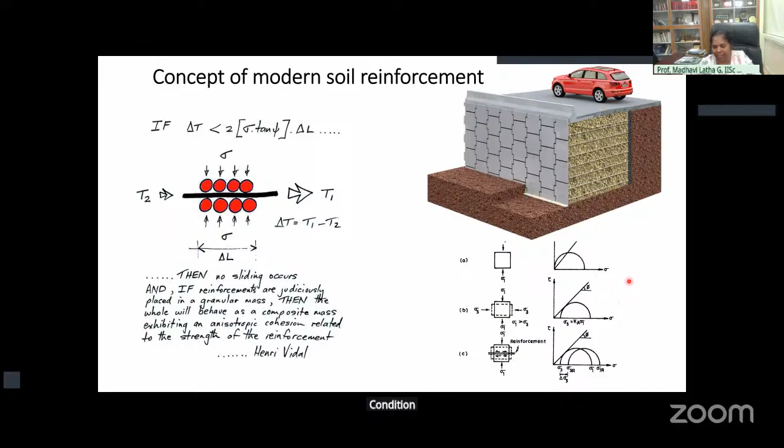With this context, we use reinforcement for different geotechnical structures, including retaining walls, foundation beds to enhance the bearing capacity, and slopes to support against sliding and other kinds of failures. When you construct an embankment over weak foundation soil, we use reinforcements either inside the embankment and also below the embankment to support these loads, and also in paved and unpaved road systems to support these cyclic loads and also to enhance the uniform load distribution.

Now, coming to the innovative geosynthetics I'm talking about. Today, I will discuss 5 different innovations that we have tried to come up with. One is geogrids with different aperture shapes and sizes. Then we also have geogrids with texture on their surface. Then we have a new class of geosynthetic system called geocell anchor cage. Then natural reinforcing geosynthetics, which are, of course, in the market for a long time, but we have some innovations in this direction as well. And then geocells with waste infill.

The first one is 3D printing of geosynthetics, which helped us in creating geogrids of different aperture shapes and sizes to customize to our needs of research currently. We have this fused deposition modeling type of printer, FDM printing, what we call in 3D printing. There are different types of 3D printing methods available in market, but for polymers, the best suited method is FDM, fused deposition modeling, where we can print the material in layers.

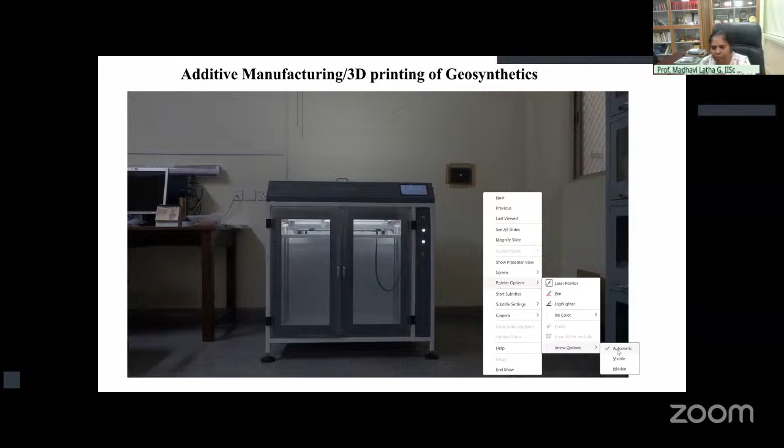This is the printing of geogrids that I'm mentioning about. Here you can see the entire printer, and we have used polylactic acid filament, which is coming into the extruder head. And here you have this nozzle in which the material melts. And then we have already given a G code to the system, which tells you the dimensions and geometry of the geogrid and the direction in which you can print. This is a simple square geogrid which is being printed here.

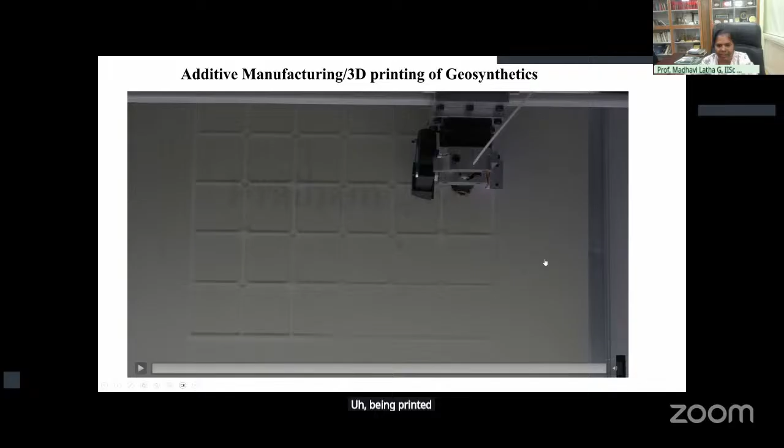And we also conducted interface shear tests on these different aperture shaped geosynthetics, where the lower box of the direct shear box and the upper box are filled with sand, and then you have a geogrid at the interface, and we apply shear, and we also do the PIV analysis to understand the shear zones that are developed. We realized that the angle of interfacial friction is the lowest in square geogrids, and Interax obviously has the highest angle of interfacial friction. In between, you have triangular and hexagonal geogrids.

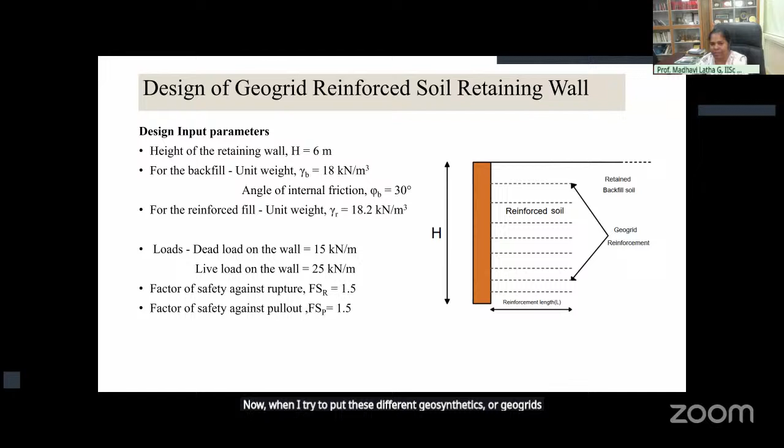And then there is some dead load and there is a live load, and we need a factor of safety of 1.5 against rupture and pull out. This is the criteria. Now, when I try to put these different geosynthetics or geogrids with different aperture shapes and calculate these factors of safety, to arrive at the minimum factors of safety against rupture and pull out, we made the calculations, and this is the length and number of reinforcement layers required for different shaped geogrids, and then the surface area of the material used, which tells us the economy of the entire reinforcement system that we're going to use.

So when you make a comparison on the percentage reduction in the material consumption compared to square geogrids, the square, there won't be any material reduction because it is a square to square comparison. In case of triangular geogrids, you have 16.5% saving in material, and hexagonal geogrid gives you 60% reduction in the material consumption compared to Interax, which gives you 50, which means that though Interax is very good at tensile strength and interfacial friction, the hexagonal geogrid is actually giving you large savings in the material because the arrangement of its ribs in 6 different directions resists pull in all these directions with least material.

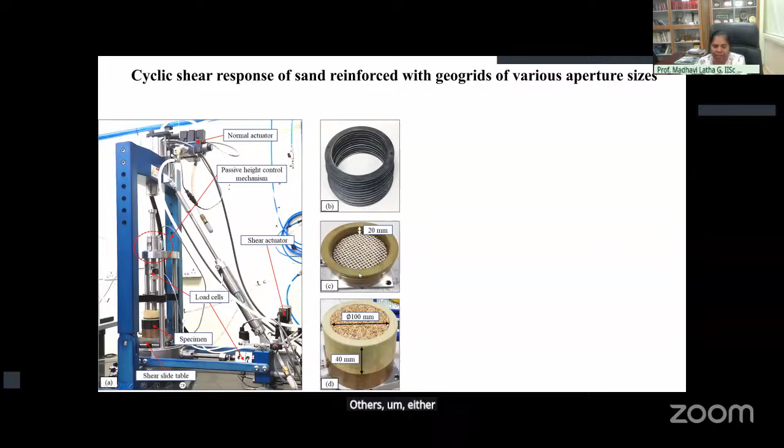This is very obvious, because when you have reinforcement in the system, sand to sand friction is reduced, and we are replacing sand partially with polymers. Polymer sand interfacial friction is definitely lesser than the sand to sand friction. That is the reason we have stiffness degradation.

However, when you have the polymer grid with aperture size matching the average particle size, you have very slow stiffness degradation. And then when we compare the excess pore pressure ratio generated in the cyclic simple shear test, when we are trying to see the liquefaction potential, the sand alone sample, that is, with no reinforcement, is actually liquefying at about 100 cycles because of the high density of the specimen.

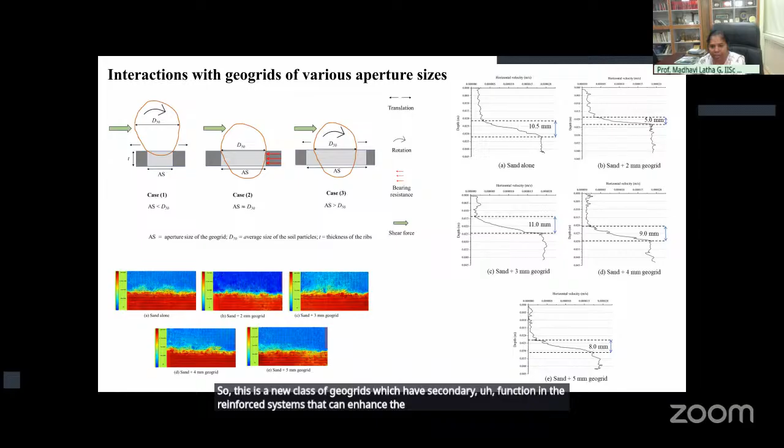So when we look at the shear bands produced, in particle image velocimetry in shear tests, we also have a comparison of shear band thickness. You have the maximum shear band thickness when particle size and aperture size match, whereas in all other cases your shear band thickness is less. This tells you that intense interactions are happening at the interface when you have an aperture ratio of 1. So this is a new class of geogrids which have a secondary function in reinforced systems that can enhance the liquefaction resistance in case of dynamic earthquake loads.

Now, the next class we are looking at is textured geogrids. If you look at the commercial geogrids, most of them have a very smooth texture. As far as I have seen, most of them are with very smooth texture. So, texture is an important parameter in geotechnical systems because it enhances the interaction between two different materials. So, we try to create different geogrids with different aperture shapes as well as different textures.

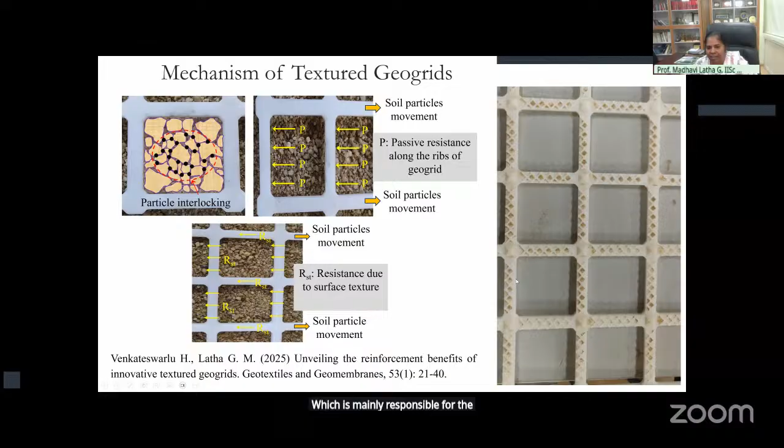Whereas when you have additional texture on the geogrid surface, apart from the passive resistance offered by the ribs, you also have resistance due to surface texture. Additionally, this is one sample of the exhumed geogrid after the test. Within the texture, the particles sit and enhance the sand-to-sand interaction instead of sand-polymer interaction, which is mainly responsible for the increased load carrying capacity and shear resistance.

Now, towards geocells. As all of you know, geocells were invented as a kind of reinforcing system for immediate needs, immediate load support, in the 1970s. Originally, they were made for providing support to structures which are moving or resting on soils of very low shear strength. Geocells have evolved over time since the 1970s, and now we have versatile geocells which can be collapsed and brought to the field, expanded and filled with soil.

And they can be used for different applications, like below the foundations for increasing the bearing capacity, below the embankments to provide load support on soft clays, and in roads in different layers to enhance uniform stress distribution and cyclic load resistance. They can also be used as facing for retaining walls. Excellent stacked facing with geocells. They are also used for erosion control.

Now, this is the evolution of geocells I am showing here. Since the 1970s, there has been a change in shape. Originally, they were square or diamond shaped, then they moved to triangular chevron patterns, to the current honeycomb pattern, which gives you the maximum enclosure with least perimeter. The surface was originally very smooth, and they are now textured, and they also have perforations to allow drainage. Originally the material was paper or aluminum, and now we have high density polyethylene and polypropylene geocells. Connections were originally made with staples or bodkin joints. Now we have moved to the ultrasonic welding process.

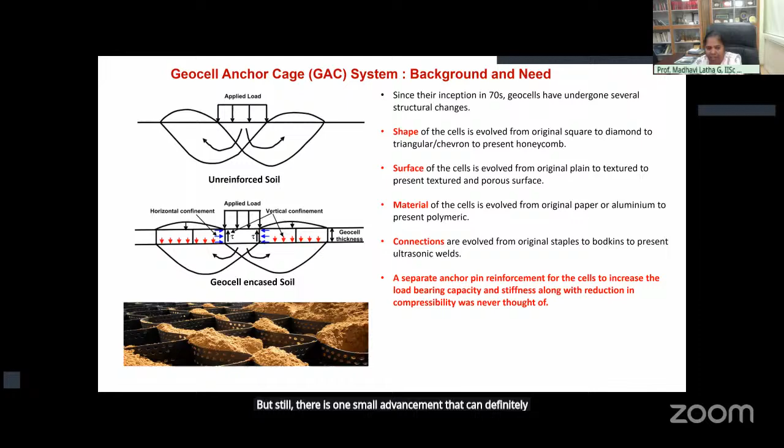All these are great advancements, but still there is one small advancement that can definitely enhance the reinforcing potential of these geocells, which I have thought about, and we have tested and established. This is called the geocell anchor cage.

To go to the geocell anchor cage, first I will tell you why geocells are an excellent form of reinforcement compared to planar geosynthetics like grids and geotextiles. When you have a geocell, it has multiple functions. One, it provides all-round confinement to the soil, and it also provides a beam effect, which acts like a mat foundation to the load. It also has a membrane effect when it is bending under the load, and it provides an anchorage effect because it has sufficient thickness along which you can enhance the interaction between soil and geocell, outside and inside.

Originally Bathurst and Karpurapu showed how this additional confinement can be quantified from simple Mohr circles, and I extended this theory to multiple geocells through my PhD at IIT Madras. Through Mohr circles we can see that delta sigma 3, which is the additional confinement due to the geocell, can be converted and quantified into the apparent cohesion induced into the soil, which is otherwise cohesionless. Now, this is proved through multiple experiments, element tests and field tests.

This is a cyclic triaxial setup that we have in our lab. A 300 millimeter by 600 millimeter specimen can be tested. This is an aggregate sample which is tested, and you can see that when you use geogrids, you have necking of the samples at locations where the geogrid is placed, whereas when you have a geocell, it is perfectly standing without any disturbance throughout the length of 600 mm, which is more than half a meter. So this is a perfect example of how geocells are very useful, not just because of the material that we use, but mainly because of the configuration of the interconnected cellular network.

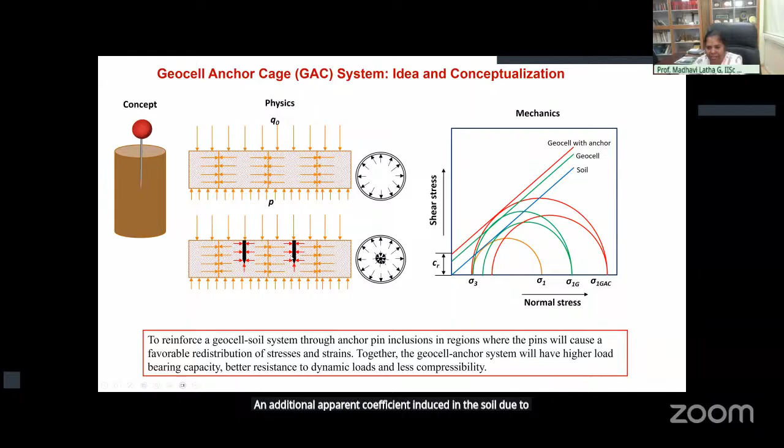This can be translated to the Mohr circle as well. You have additional confinement and additional apparent cohesion induced in the soil due to the geocell anchor cage. This is a project I executed for SERB, and we have got excellent results and publications through it. So this is the concept of the geocell anchor cage, where you have a geogrid with anchor pins which will be placed exactly at the center of the geocell layer. But this can be on top or bottom.

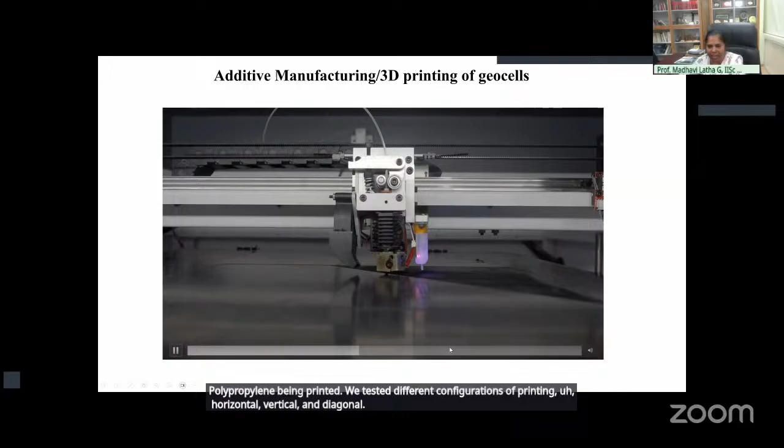So which configuration is better is what we researched also. And to manufacture these geocells with the central geocell anchor cage, again we used 3D printing. Here we used polypropylene to create geocells. These geocells are printed in the lab using FDM 3D printing. You are seeing the sheet of polypropylene being printed. We tested different configurations of printing: horizontal, vertical, and diagonal.

And then we realized that the diagonal printing gives you the maximum tensile strength as well as interfacial friction, because the horizontally oriented fibers get separated easily where they are fused within the joints, and vertical ones will only provide resistance along the filaments, whereas diagonal ones have both fiber strength and the adhesion between the filaments coming to the rescue when tension is applied. So this is also tested in interfacial friction, and intuitively you can see that the diagonally oriented polypropylene sheets provide maximum interfacial friction because of higher resistance offered to the motion of particles in the direction of shear.

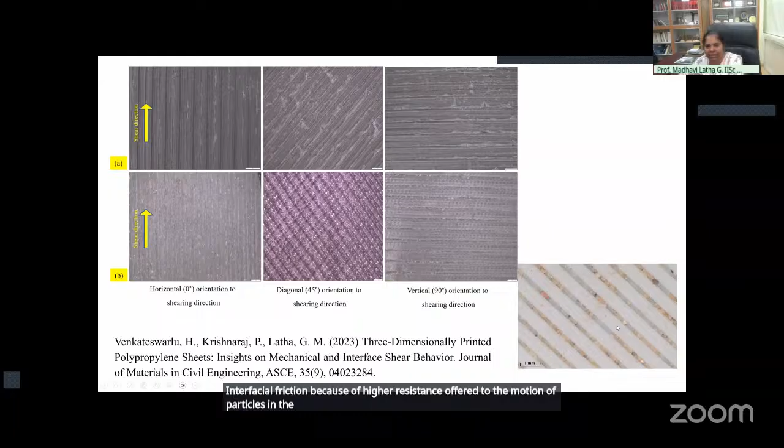Now the question here is the anchor cage. How do you manufacture it? This is the anchor cage 3D model, which is developed in AutoCAD and then converted into an STL file, which is needed for the 3D printing. And this is the 3D printed geocell with a 3D printed anchor cage. This anchor cage is made of polylactic acid.

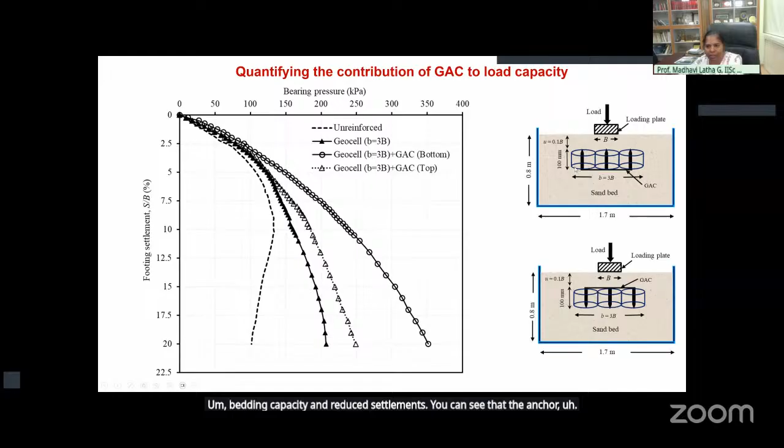Now, you have the load test on these geocells with anchor cages in different configurations, top down and bottom up kind of configurations. And we see that the one where we keep the basal geogrid at the bottom with the anchor pins facing upward gives you the maximum bearing capacity and reduced settlements. You can see that for the anchor cage with geocells up to 3 times the breadth of the foundation, in both up and down configurations, the bottom-up one is much superior to the top-down configuration.

Now, this is equal to when you have 3 geocells with a simple anchor cage, it gives you the same reinforcement benefit as a 4 geocell reinforced configuration, which gives so much savings in the materials. Now, quantifying the bearing capacity ratio, you have almost 2.75 to 3.5 bearing capacity ratio with geocell with anchor cage compared to the system without anchor cage. The reduction in settlements is also more than 60% when you have this geocell anchor cage because it provides basal support, and also there is a mechanism which I'm going to explain now.

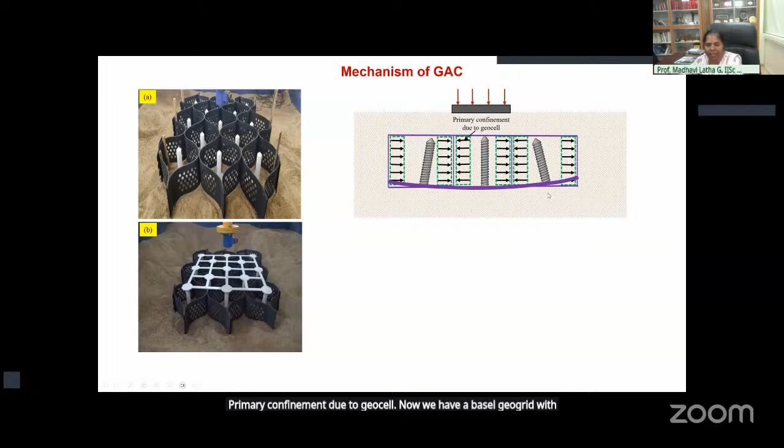This is the top and bottom configuration. And if you have this geocell layer, you have this all-round confinement effect acting like this. Primary confinement due to geocell. Now we have a basal geogrid with anchor pins, and under the load it tries to bend and the pins converge. Now you have this additional confinement effect due to the pin, and then you also have the anchor pin acting as a shear connector, and then the soil acting as a frictional medium. So the entire system of geocell plus basal grid and anchor pin becomes one system with frictional sand in between and additional confinement due to the pin, which is responsible for this enhanced bearing capacity ratio, almost 3.5 times the original bearing capacity.

Now, if you put the same anchor cage at the top, you are missing the basal support, and the pins diverge instead of converging, so that reduces the confinement effect, and that is the reason for lower reinforcement benefits of this kind of configuration. And when you look at the surface heaves, the top configuration still gives you some heave, whereas the basal grid with anchor pins gives you absolutely zero surface heave.

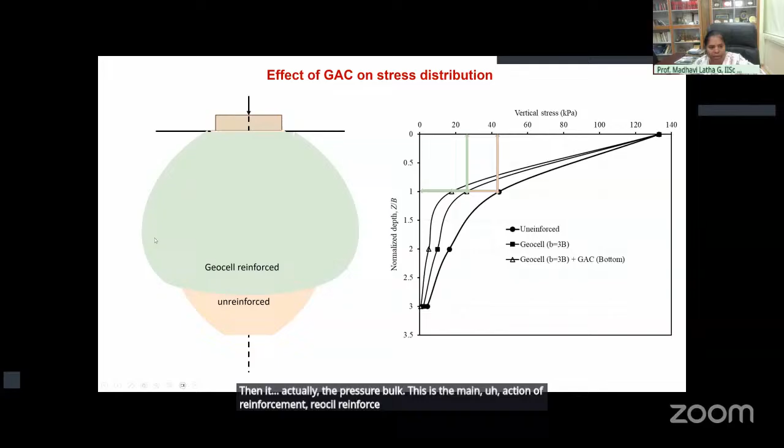And the distribution of stresses below the foundation, for the case of unreinforced soil, is like this pressure bulb. If you have geocell with thrice the breadth of the foundation as its width, then it changes the pressure bulb. This is the main action of geocell reinforcement. It reduces the height of the pressure bulb and distributes the loads more horizontally. Now, if you have an anchor cage, it further reduces the depth of the pressure bulb and enhances this load distribution, which is very, very helpful in the case of pavements.

And then you have multiple benefits of these geocell anchor cages. One is improved confinement, improved lateral resistance, and improved anchorage effect, because you have 4 faces getting anchorage effect. And the beam effect also increases because of enhanced stress distribution. And you also have an enhanced membrane effect because of the additional tensile strength offered by the anchor pins.

Now, when we are talking about earthquake resistance, how geocell anchor cages or geocells can be helpful is a very, very interesting topic, because for earthquake resistance, the main function needed from the reinforcement is ductility. Because the more ductile the system, the higher the earthquake resistance of the system. So, for example, you have a boat riding on a wave. As long as the boat moves along with the wave, there will not be any damage.

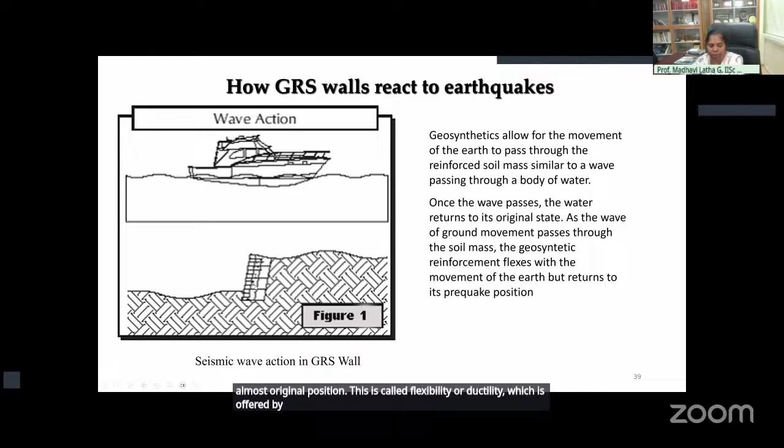Similarly, a reinforced retaining wall, when there is an earthquake, is very flexible and deforms in line with the movement of the shear waves which are passing. And once the shear wave recedes, the retaining wall comes back to almost its original position. This is called flexibility or ductility, which is offered by reinforced systems in general. But now with enhanced reinforced systems, you can improve the ductility even further.

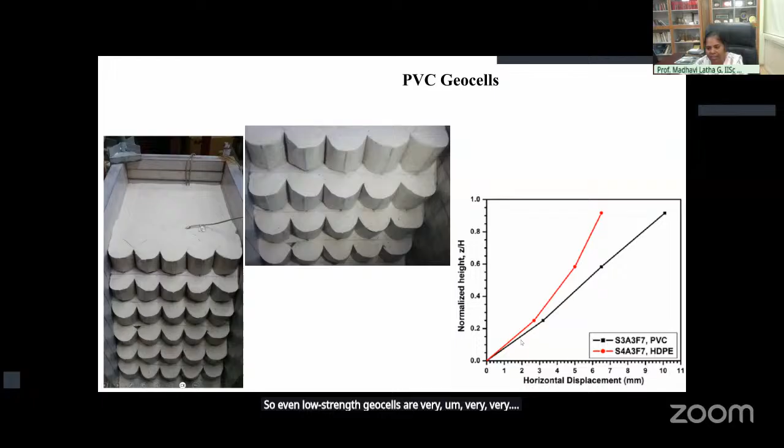Now, we can also use 3D printed geocells. There are 3D printed PVC geocells, which can be made as low strength geocells. But like I already said, the strength of geocells, or the reinforcement action of geocells, is mainly due to the cellular confinement network and all-round confinement, beam effect, and membrane effect. So even low-strength geocells are very, very useful in reducing deformations under seismic loads.

Now, the next innovation should be in the form of the fill material within the geocells. For example, we use high friction sand. Typically, we use cohesionless soils within the geocell pockets to provide the reinforcement for retaining walls, embankments, and foundations.

But the world is running out of sand. There is depletion of sand resources, and we have an immediate need to find alternate materials. Manufactured sand is being used in construction, but it has yet to enter our geotechnical constructions. If we stick to cohesionless soils with the friction angle requirements specified by our codes, we will have a lot of problems constructing reinforced soil structures in the coming days. So we have to look at alternate materials, and the world is looking at alternate materials too.

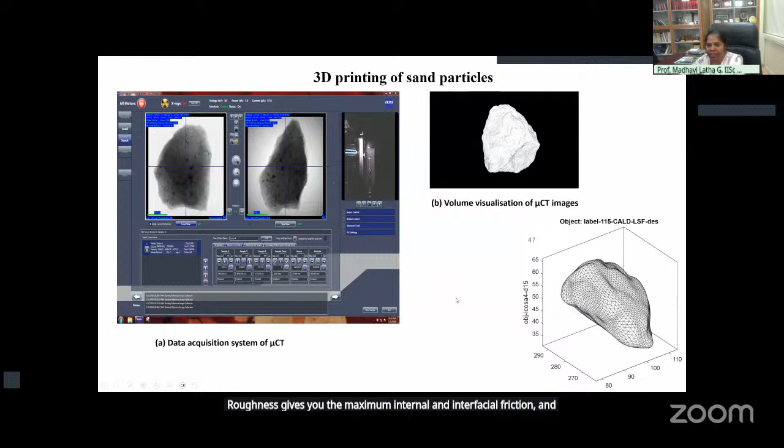So to do this, we have very fine micro level research going on where we can actually create sand particle shape and size. When manufacturing sand, we want a good sand with sufficient particle friction and sufficient surface roughness, so we can get maximum benefits from interfacial friction and overall internal friction. This is the micro CT of a natural sand particle, which can be converted into a geometric shape through spherical harmonics. You use micro CT to get the shape parameters, then use mathematical formulations to create the geometry of these particles, and research what particle shape, size, and surface roughness gives maximum internal and interfacial friction, using waste materials to produce these sand particles.

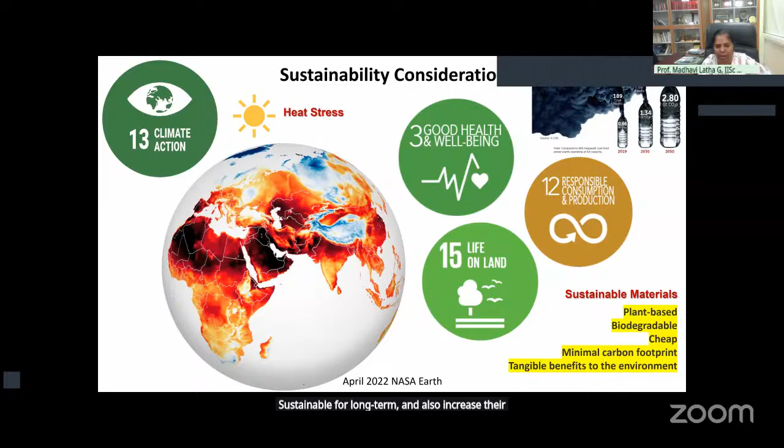To improve life on land and life underwater, we need to move towards good health, well-being, and responsible consumption, with lower carbon footprint materials. Plant-based biodegradable materials come to the rescue because they are very cheap, biodegradable, and sustainable. The only problem is they are of very low strength and not sustainable for the long term. So we need to find methods to make these materials sustainable long term and also increase their interaction with soil, so we get benefits similar to what we get from polymeric reinforcement.

We are working on this. There are materials like coir and jute, which can potentially be used to make geocells, geogrids, and geotextiles as well. They already have enhanced interfacial friction because of their natural surface texture. But the main problem is their tensile strength, which is comparatively low.

But these can be enhanced with interventions like geocell anchor cages that I mentioned before, so that the reinforcement of the system is equal to the reinforcement provided by polymeric geosynthetics. The only concern is the long-term sustainability. I'm also working along with the chemistry group of IISc to provide solutions for the non-biodegradability and hydrophobic nature of geosynthetics when they come in contact with water and soil. So that's still at a research stage.

But to give you a brief on how these materials can be extremely beneficial under conditions prone to liquefaction, we tried cyclic simple shear tests with coir fibers. And interestingly, a lot of earthquake liquefaction resistance is exhibited by the samples which are reinforced by coir fibers. If a natural sand failed within 9 cycles, the liquefaction happened, whereas a specimen reinforced with coir fibers to 0.75% by its volume showed resistance up to 65 cycles, which is a great, significant improvement. And the stiffness degradation is very, very slow in the case of reinforced specimens.

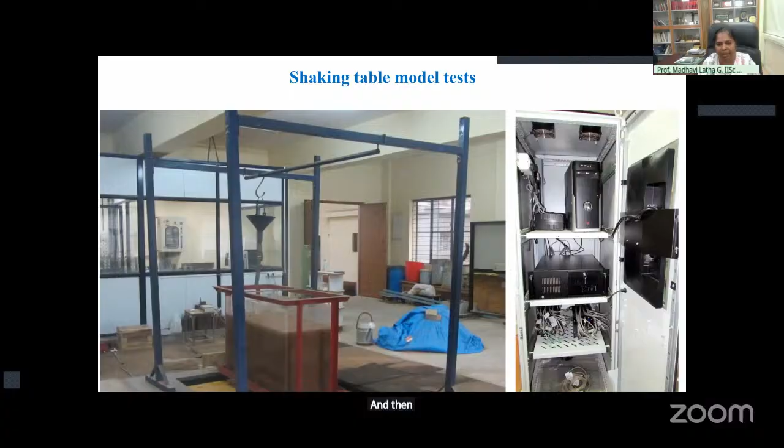And then we also did shaking table model studies to check the large scale applicability of this. We see that the unreinforced specimen failed quickly under shaking, whereas the coir reinforced model did not fail or liquefy even up to large shaking. So the main mechanism here is the pore pressure response; you can see a very, very low pore pressure response. The main reason is that when you are applying shear, the coir fibers are getting stretched, and that provides additional tension, which opposes the movement of particles. Also, the interstitial pressures within these coir fibers actually reduce the pore pressure propagation from bottom to top, which is the main reason for liquefaction resistance.

So this research tells you that there are ways in which we can use natural materials in our geotechnical systems for secondary functions like liquefaction mitigation, which has to be explored in the future. And there are sustainability considerations which make all the innovations that I've shown in today's presentation very sustainable, because we can explore eco-friendly options with technical interventions. We reduce a lot of waste through smart manufacturing, and we reduce carbon footprint because we use less material, natural resources are used very little, and we use automated construction methods. And this is how this becomes a very sustainable thinking process towards achieving the sustainable development goals. Thank you so much.

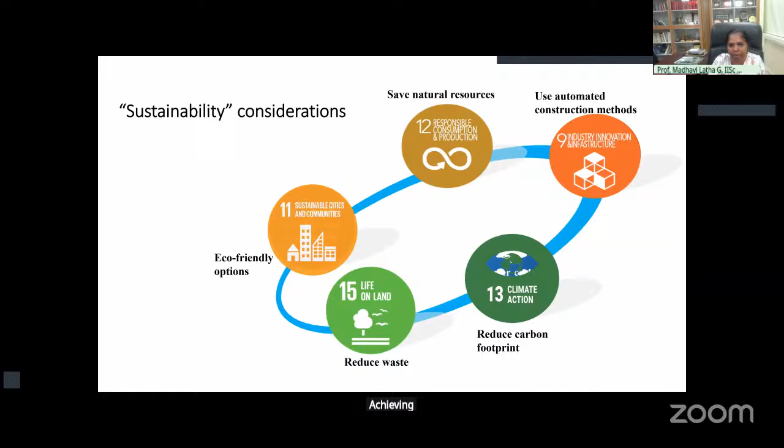Thank you, Professor Madhavi Latha. And I must say this was a very energetic session that we had, marking the very first session to be highly energetic. So we'll be quickly taking a few questions in the Q&A session. Okay. Yeah, sure.

So let us take the first question, from Mr. Haldar. The question says, in an earth retaining structure, can I use geogrid layer by layer? It can reduce the thickness of the earth retaining structure. I didn't quite get the question. Geogrids are being used layer by layer. It is not about reducing the thickness of the retaining structure, because the height of the retaining wall remains the same. The higher the height, we have maximum benefit, right? We are going to increase the height of the retaining wall by putting reinforcement, because we are able to stop the failure due to overturning and sliding even up to larger heights. So the purpose of reinforcement is to increase the height with the same material.

Thank you. So the next question is from Mr. Mandal, and the question says, how will installation damage affect the texture of the geogrid, which will affect the increase in BCR? Yes, it's a very interesting question. Yes, the geogrid texture, when you are trying to put large boulders, it can actually become flattened. So this needs some research. Definitely, I'm not saying outright that nothing happens to the texture. But most of the time, the texture that we are providing is not sharp in nature. It's a kind of flat texture. I have shown a diamond shaped texture which has flat edges. So intuitively, I think it will not get damaged by installation or passage of vehicles on it, but it needs to be tested.

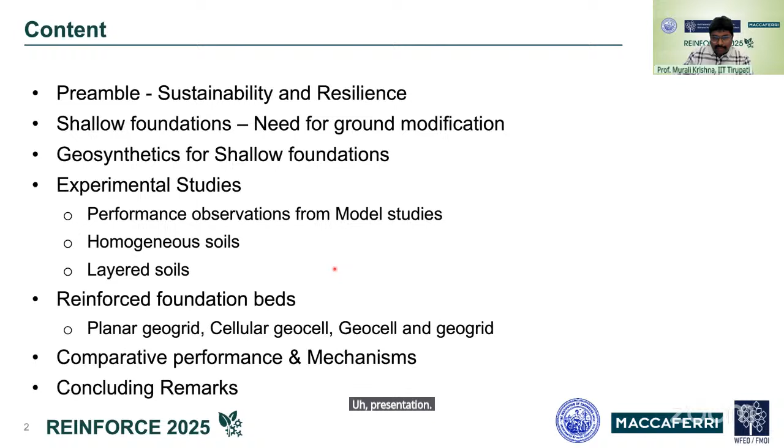Before going further, I would like to acknowledge the people. Dr. Arghadeep Biswas, who was my PhD student at IIT Guwahati and is now working as faculty at Jadavpur University. The student was co-guided by Professor Sujit Kumar Dash, who is currently a professor at IIT Kharagpur. And of course, Professor Sireesh, who is working at IIT Hyderabad. We were contemporaries at IISc. During my PhD time, he was doing several model studies on geocell reinforced foundation. That is where I was exposed to geocell reinforced foundation systems.

So as I said, a preamble: we are witnessing significant infrastructure growth in the country. Of course, for any country to be a developed nation, its infrastructure growth is of primary importance. While developing infrastructure, we have to ensure resilience and sustainability, which is a very significant aspect we need to focus on.

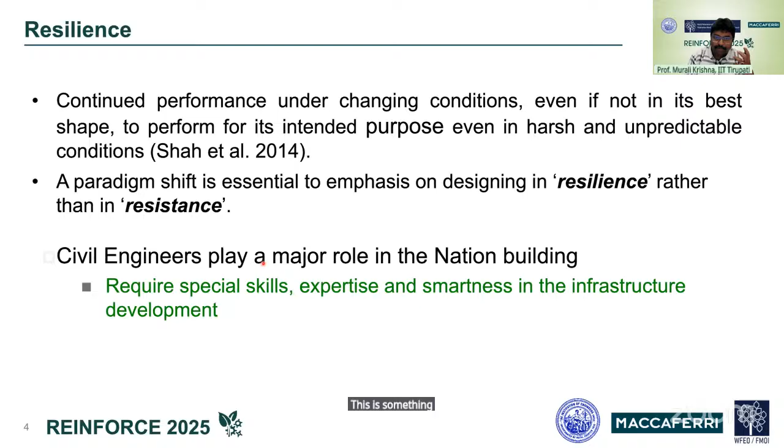As part of this nation building and infrastructure development, all civil engineers play a major role in ensuring sustainability and resilience in the infrastructure we are developing. This requires special skills, expertise, and smartness in infrastructure development, basically understanding various new developments, new materials, what the sustainable approaches are, and how to enhance resilience. These are the key elements. This is the preamble I would like to set as the context.

In some situations, we need to replace the topsoil when the bearing capacity is not meeting the requirements. This could be a complete replacement, with some material involvement. What we are trying to see in today's lecture is how we can modify this particular ground, how we can observe its performance, and so on.

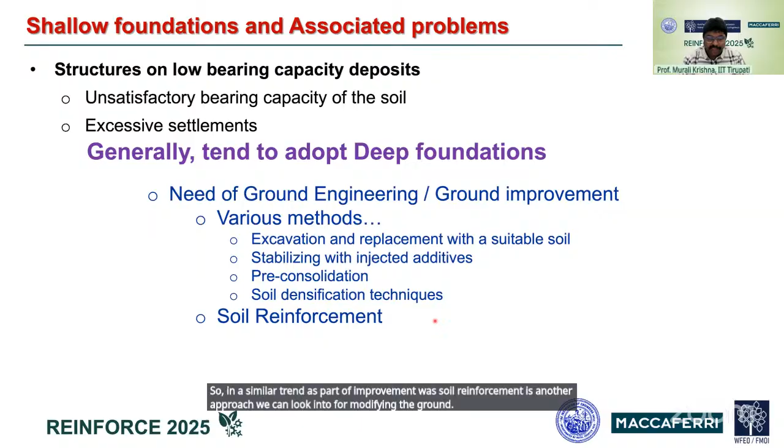A simple one is the excavation and replacement with a suitable soil, or stabilizing with injected additives, some grouting, etc. In very soft soils, where there are soft clay deposits, one can go for consolidation, pre-consolidation approaches. In some cases, in loose sandy soils, soil densification techniques could also be used. So in a similar trend, as a part of improvement, soil reinforcement is another approach we can look into for modifying the ground and enhancing the performance of the foundation system.

What can we do? So let us see how foundations on reinforced soil beds could be seen. What we do here is remove the existing weak soil up to some shallow depth below the foundation, and replace it with granular soil, preferably granular soil, reinforced with horizontal layers of high strength reinforcement, geosynthetic reinforcement, metallic reinforcement, etc. Different strength reinforcement can be included, of course.

So what are the advantages of these reinforced soil beds? It will increase the bearing capacity, and obviously it will reduce the settlement, of course. Another big advantage is that it will reduce the differential settlement. That's a major advantage. The whole system works monolithically, and reduces the differential settlement. In many cases it can avoid the deep foundation situations. We can reduce the necessity for deep foundations. Sometimes we can change the type of foundation; let us say if you want to go for a mat foundation, we can avoid it, and some other deep foundations could also be avoided. So there are some advantages that we can see.

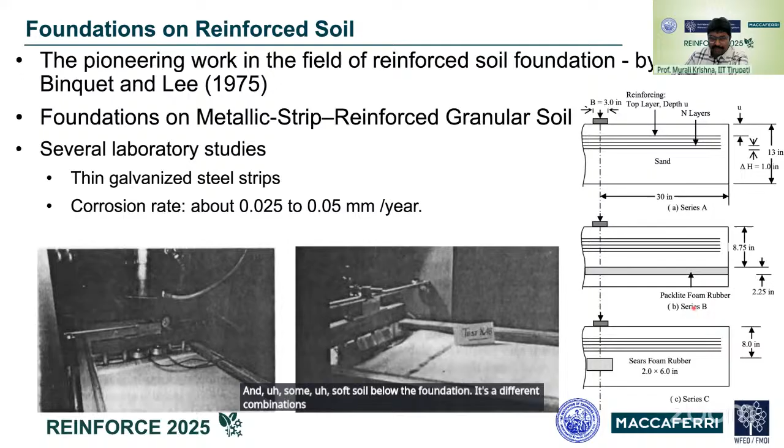So that's how the reinforced soil foundations work. Now, going to the studies on reinforced soil foundations, the whole credit goes to Binquet and Lee in 1975, where the pioneering work was done. They did some model studies concerning the strip foundation. In that earlier study, they used galvanized steel strips as the reinforcement, small strips, and they considered some thickness, which also takes care of the corrosion rate. The typical foundation configuration they considered had different reinforcement layers, different depths below the foundation, and some soft soil below the foundation. Different combinations they considered and tested. And this is the first study of its kind.

In arranging this reinforcement configuration, this is a more detailed schematic view. If you see, a footing of width B has been placed, and the first reinforcement is placed at a distance U from the bottom of the footing. And you can see there are, for example, n number of reinforcement layers placed. Each of the reinforcement layers has a width of B, and these layers are spaced at a small h apart. This is the typical configuration that people see.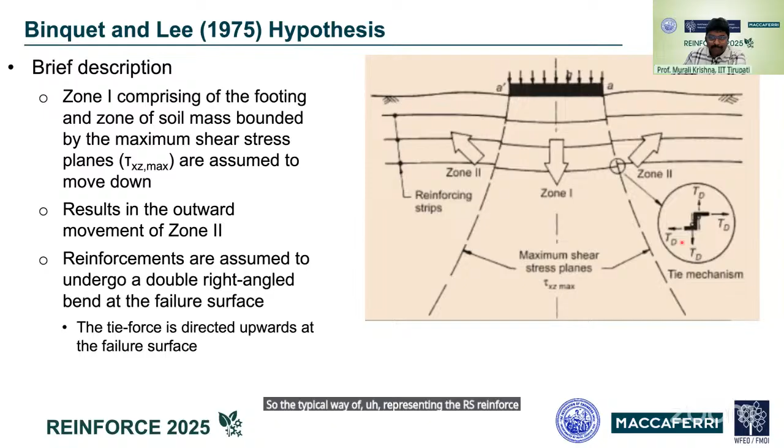A double right angle bend is expected at the junctions, which will produce a tie force in the upward direction, opposite to the direction of the loading. So that is the typical way of representing the reinforcement force. This is a starting point, and several studies were done modifying different conditions. So there is a way of quantifying this zone: at a different depth, at what distance this particular failure zone could be developed.

This is one study by Shin et al., where they have quantified the distance with depth, at what depth and what distance that particular failure zone will be there. This is the minimum distance. This will give us some idea about how much reinforcement length is to be provided, which is depicted in this particular figure. Some other studies are also there where they presented hypotheses of different bearing capacity behavior, in terms of the generation of the failure surface and the resistance. These are different possible ways of looking at it.

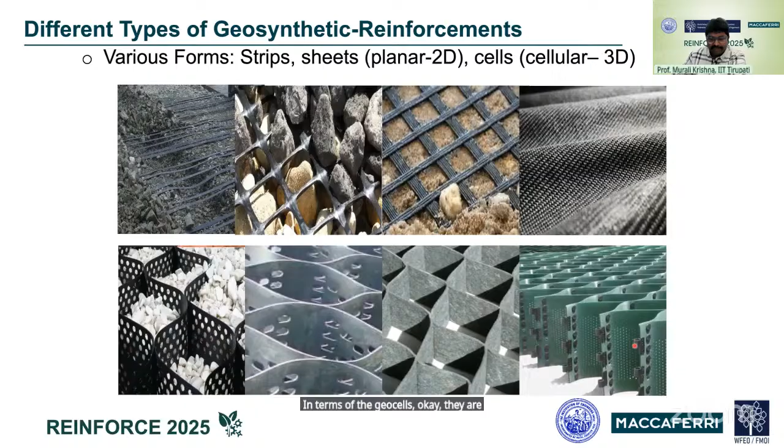And bearing capacity improvement is widely used for embankments and storage tanks, which are large structures, by applying geosynthetics and reinforcement. So that sets the context of geosynthetic reinforced foundations, the preliminary studies, and the typical observations we can see. Now, as I mentioned, different forms of geosynthetics are there, like uniaxial geogrids, biaxial geogrids, geotextiles, geomembranes, and the three-dimensional geogrids in terms of geocells. They are ready-made geocells.

Referring to the previous configuration that was discussed, a typical shallow foundation bed reinforcement configuration could be of this nature. If we are using a two-dimensional geosynthetic material as reinforcement, we can have multiple layers below the foundation, or we can also use a geocell layer in the foundation system. Several earlier studies have considered homogeneous soil, either very soft soil, which could be a sand or clay type material, and focused on how the improvement is obtained. So these are the typical responses observed from different studies.

This is one model test setup which was used by Sirish in 2006 for studying the improvement in the performance of geocell foundations. It shows a typical configuration of the load setup, where the loading has been applied and the surface deformations are observed, along with some pressure observations inside. This is a sort of plane strain condition simulation to observe the improvement in performance.

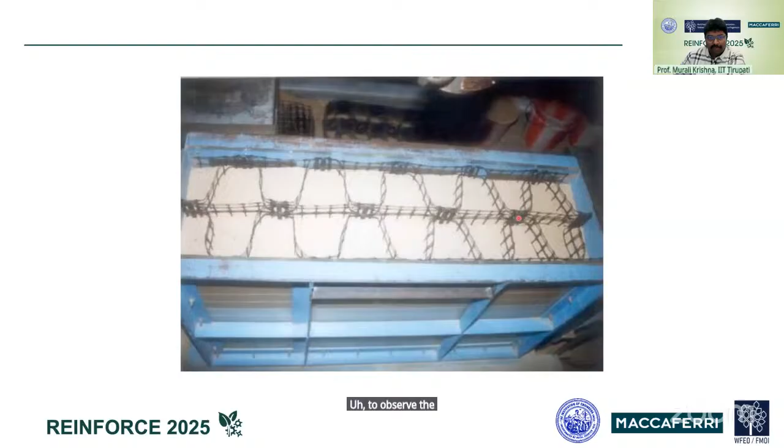So in general, if you summarize the geocell reinforced foundation system, the geocell sand matrix would have a thickness of H, the thickness of the geocell. The diameter of the foundation is represented by D, and U is the depth from the foundation base at which we are placing the geogrid or geocell, and other things.

So when you look into the geocells, the aperture opening size is another important parameter. Orientation of the ribs and what pattern is being adopted is seen. And various researchers have focused on different parametric ways, and they conducted different tests.

Our study, as done by Argadeep, focused on the influence of subgrade strength and test geometry on the performance of the geosynthetic reinforced foundation. You see here some homogeneous soil to some significant depth is taken. It could be of different strength values, different material.

So as a first step, different alternatives are considered. The first is removing the top soil and filling with unreinforced sand. Generally, this is the common approach. When the soft soil is there, some topsoil will be removed and replaced with good fill material, and then conducting the test. This is the primary one.

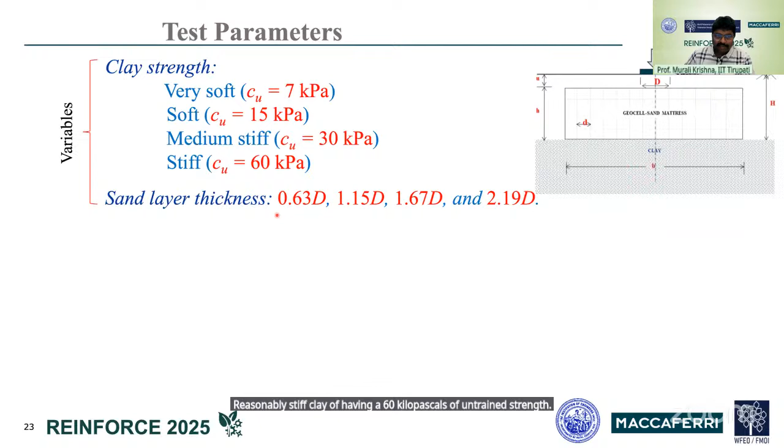So the variables considered are the in situ clay condition. It could be a very soft clay with undrained cohesion of 7 kilopascals to a reasonably stiff clay having 60 kilopascals of undrained strength. The study also considered different variations of the sand layer thickness, the capital H here, which includes the thickness of the geocell and reinforcement, and U is the top one. So we considered these four different variables.

And some other constant values considered: the depth of placement U is constant in all the cases, 0.1D. The pocket size of the geocell matrix has been considered as 0.8. The relative density of the infill sand and the top sand layer has been considered as 80%. And of course, the width of the geocell matrix and base width of the geogrid, B, is considered as 6 times the diameter of the footing. This is the general configuration considered.

So with those parameters, 5 series of experiments were conducted to understand the effect of subgrade strength on different parameters of H by D and others, and this is the experimental program. So we will see one by one. This is the model setup.

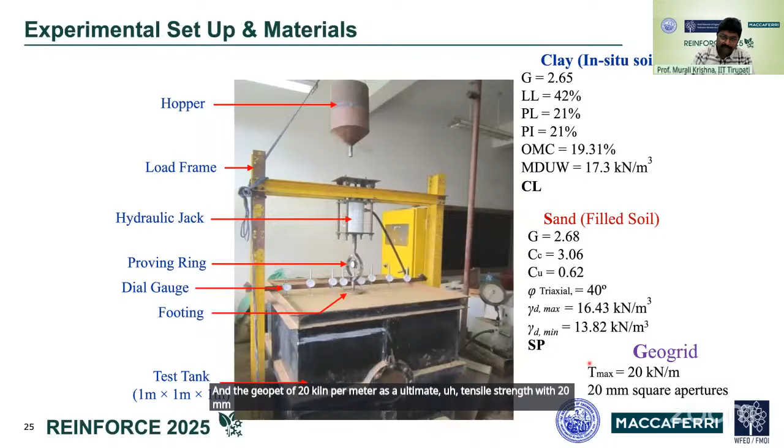Which is primarily a 1 meter by 1 meter by 1 meter test tank, and a footing of 150 mm diameter is considered, and the clay soil having these properties, which is CL, and the sand soil having these properties, poorly graded sand, and the geogrid of 20 kilonewton per meter ultimate tensile strength with 20 mm square apertures. There are some properties of the clay and other materials shown here.

And for preparing the clay bed, several trials were done varying water content and compaction, and some standardized density and water content values were obtained to arrive at the desired shear strength of the soil. And the soil has been filled layer by layer to obtain the complete test tank filled with it.

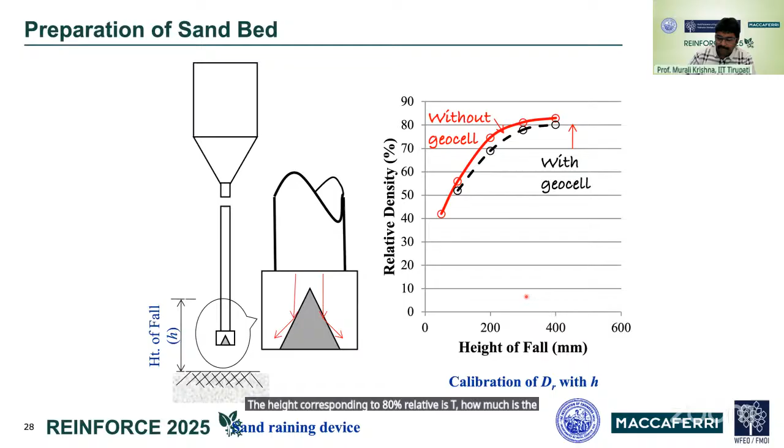And over that sand has been placed, and the sand bed was prepared using the sand raining technique. From the hopper, sand will be poured, which will be dispersed here. To get the targeted relative density by this method, several trials were conducted, and the height of fall corresponding to 80% relative density has been followed. And this is a typical picture of the sand raining technique, a simple one. Of course, there are several sophisticated setups where large chambers could also be placed and sand placed automatically.

Geocells have been prepared using the GeoGrid, and the GeoGrids were cut into transverse and longitudinal members. They put together longitudinal members and transverse members, connected using the bodkin joints. The strip is considered the bodkins, used to form the geocells of this nature. This is the geocell, in various configurations.

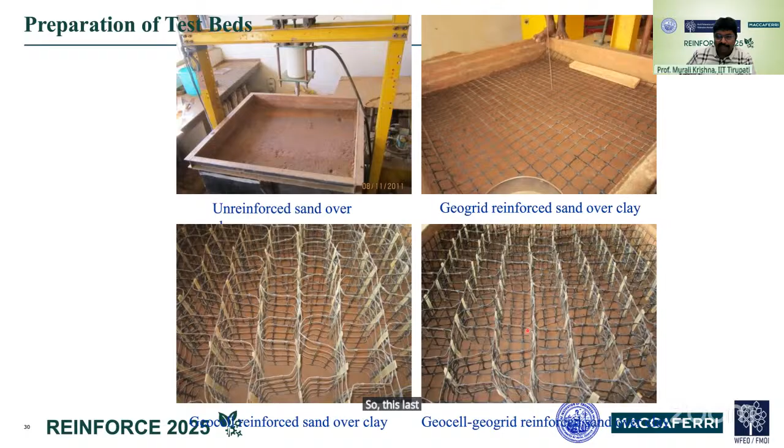This is the unreinforced sand over clay bed. This is a GeoGrid reinforced sand, where only GeoGrid has been placed. This configuration shows only the geocell. This last configuration is where the GeoGrid, the base, and geocell come together, placed onto the system.

As we have seen earlier, the typical response of unreinforced soil and reinforced soil gives two types of responses that can be obtained. The analysis of these results will be done in terms of the bearing capacity ratio. The bearing capacity ratio is calculated for a given settlement — at that settlement value, what is the unreinforced bearing capacity, and what is the reinforced bearing capacity? The ratio, QR by Q naught, will give you the bearing capacity ratio.

Another parameter that can be considered for evaluation is for a given loading condition, Q. For a given loading condition, what is the settlement in the unreinforced case, S naught, and what is the settlement in the reinforced case, SR? This ratio also shows how much settlement reduction is obtained.

Sometimes we can also represent the bearing capacity improvement rate with reference to its unreinforced capacity — how much is the rate of improvement. This is QR minus Q naught, the difference between these two, with the ratio over the original one also being represented. This bearing capacity improvement rate can also be used for obtaining some results analysis.

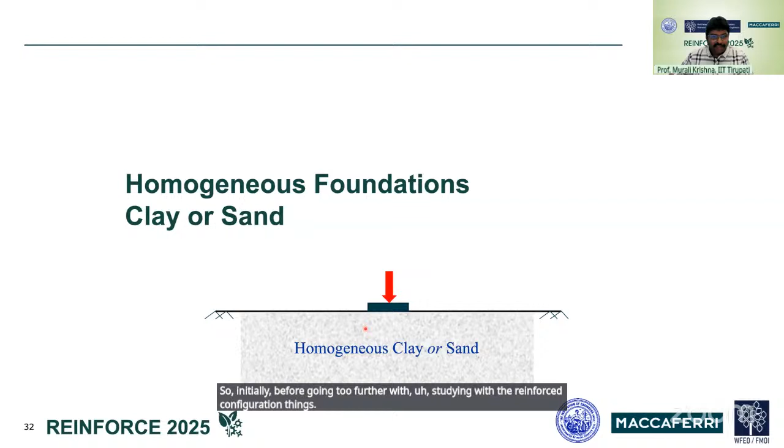Now going to the test results that were obtained. Before going further with studying the reinforced configurations, it is essential to look into the unreinforced sand responses. Here, homogeneous clay or sand has been used for testing. As mentioned, there are four types of clay subgrades and one sand subgrade used.

These are 7 kilopascals, 15 kilopascals, 30 kilopascals, and 60 kilopascals CU value, showing how the foundation responds. It's very obvious that when you increase the subgrade strength, the in-situ soil strength, we get improved performance, which has been significantly improved.

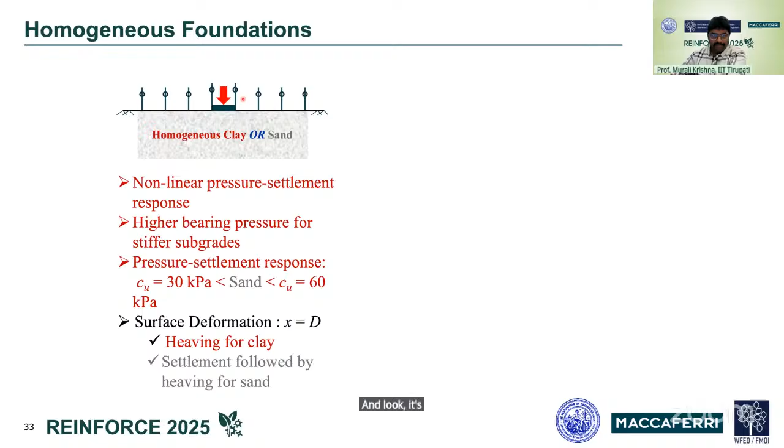Another test with 80% relative density sand has been used as a material and tested for its capacity as a whole. We can see the 80% relative density sand shows slightly lesser bearing pressure compared to the 60 kilopascal case, and of course this gives larger strength compared to up to 30 kilopascal. It's also observed that heaving of the surface occurs when you load, and heaving at the surface has also been obtained in this case.

The second configuration has the top some thickness of the soil replaced with sand soil. Again, it's a layered configuration, but unreinforced — there is no reinforcement in this case.

When you see the responses, the dashed line shows the homogeneous soil case, and this solid line shows the layered soil with sand having 0.63 times D as the thickness. In all the curves, we can see there is a significant improvement in the capacity when we are replacing the topsoil with unreinforced sand.

While conducting tests for different thicknesses, the optimum layer thickness has been obtained as 1.67 D. If you replace the top 1.67 D with sand, that's the optimum thickness. This thickness can be modified, so these are some configurations for a given case.

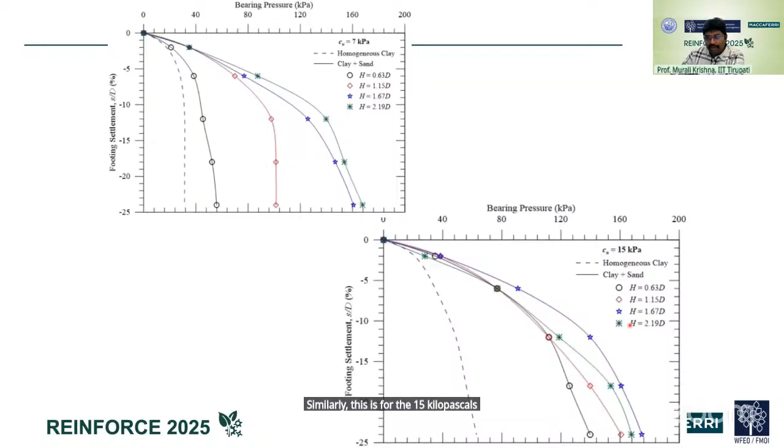Homogeneous clay of only 7 kilopascals, having the unreinforced homogeneous soil, and for different thicknesses of the sand layer, the improvement is represented here. Similarly, this is for the 15 kilopascals undrained shear strength soil, and for different responses, how the clay plus sand performs is obtained. From this, it has been observed that 1.67 is ideal.

The next step is including the reinforcement at the interface between the sand and clay. A geosynthetic reinforcement has been placed here, and the responses were observed. This is a typical picture of what we can see — the geogrid for different undrained shear strength values, and different 0.63 thickness were considered.

Reinforced sand layered configuration, and the reinforced layer configuration again has been shown. So again, you see from the unreinforced case to the reinforced case, there is a significant, very dominating improvement with the inclusion of a single planar geogrid at the interface, irrespective of all the configurations. We can read and understand the different levels and so on.

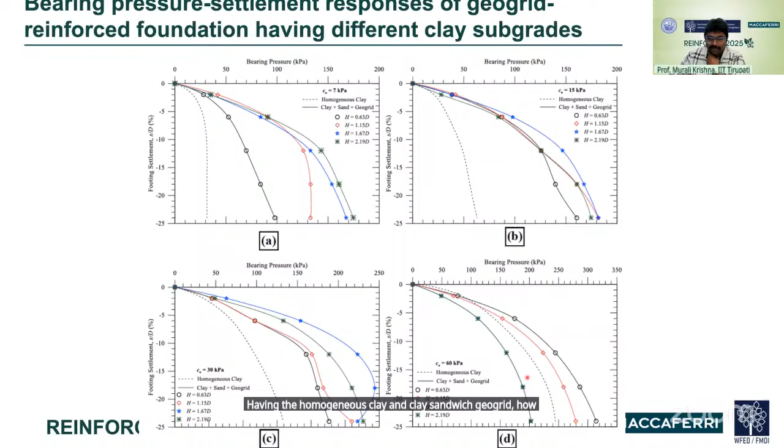For softer subgrades, the optimum thickness has been obtained as 1.67 times the diameter. If we have a stiffer subgrade, for example a 60 kilopascal subgrade, then 1.15 times the diameter is the thickness we can obtain. Again, those results were obtained for 7 kilopascals, 15 kilopascals, 30 and 60 kilopascals, having the homogeneous clay and clay-sand bed with geogrid, and how the different performance could be obtained. These pictures are self-explanatory.

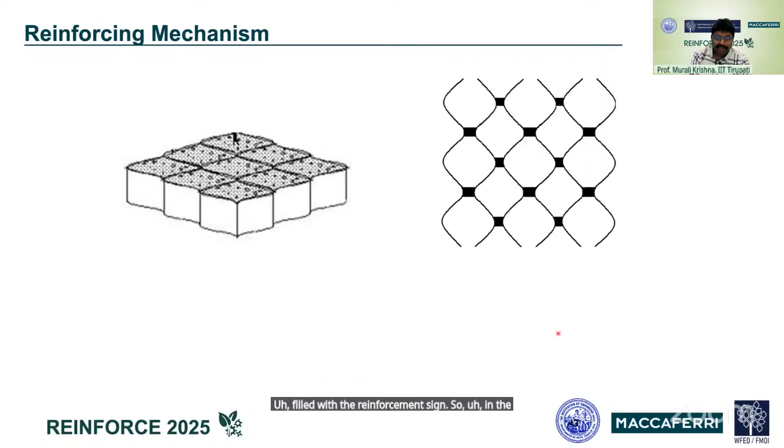So in the geocells, the confinement, interaction, locking, and various mechanisms will occur. The main mechanism which we can dominantly see in the use of geocells is the confinement. Confinement is a special mechanism which operates in the geocells to further enhance their capacity. So this is how the confinement works along the walls and the interface section also, and this geocell would act like a semi-rigid beam, dispersing the load to a wider area and enhancing the capacity. That's what will happen. Schematically, one can represent it by the improved area, confinement, and interaction among the components. So how the shear could be developed can be represented in this one.

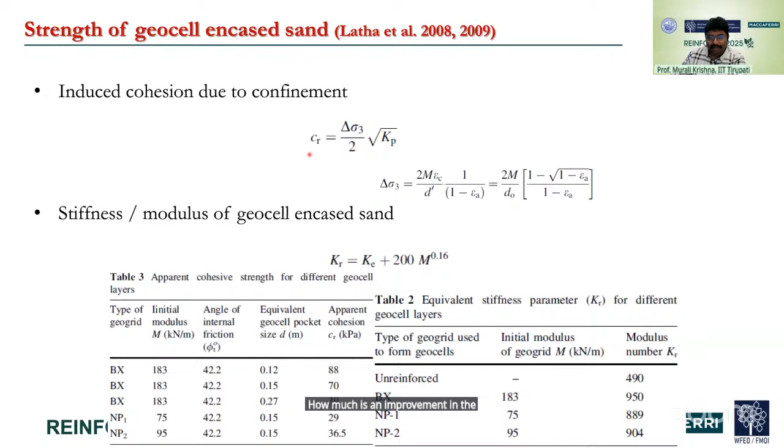The effect of these geocells on the improvement has been studied, as Professor Madhavi Latha previously also mentioned. Some element tests and model tests were done. They quantified how much the improvement in strength is in terms of the delta sigma 3 lateral confinement effect and other ways, and evaluated the improvement in terms of lateral dispersion effects, how much the vertical stress dissipation effect is, the membrane effect, etc. These could be used to quantify the bearing capacity of the improved soil using the geocell approach.

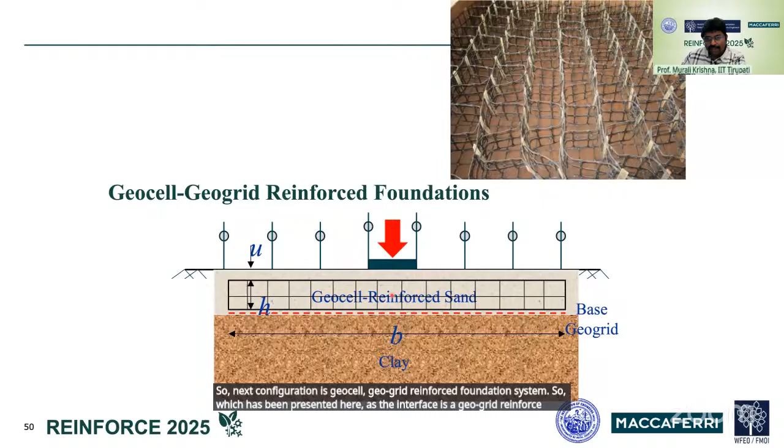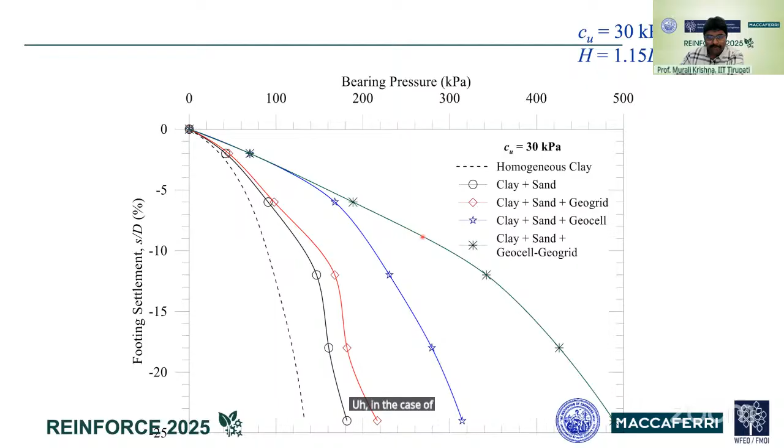The contribution of different things in terms of either sand layer contribution, geogrid, geocell contribution, and geocell and geogrid contribution could be quantified with reference to the different reference parameters. So sometimes we can use the homogeneous clay bed as a reference, we can use the unreinforced layer foundation as a reference value. So we can get the improvement level of different contributions with reference to the earlier explained parameters, either bearing capacity ratio, improvement factors have been obtained. So the typical improvement factors, what we can see.

So when your subgrade strength is very low, you will be getting very high significant improvement factors, and in a moderately high subgrade strength, you will be getting relatively less, but still you are able to improve the capacity to a much higher level, up to about 2 to 3 times. And for settlement level, these improvement factors would be enhancing with the settlement levels and so on. So these comparisons are with reference to different subgrade strength and other things.

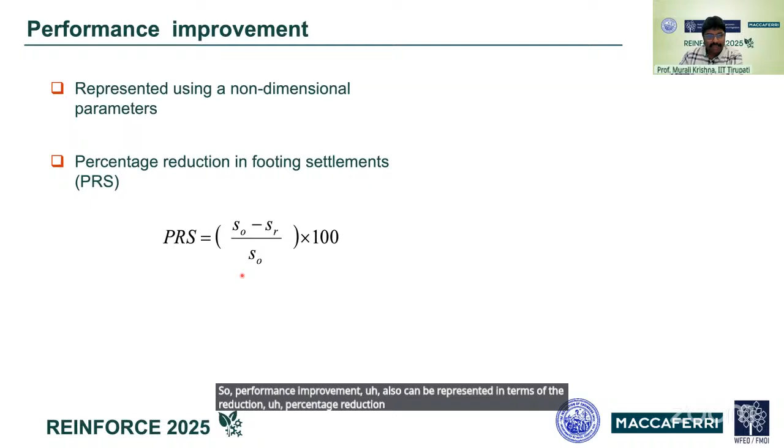So performance improvement also can be represented in terms of the percentage reduction in the footing settlement. It is like an improvement rate parameter, which can also be used for evaluating the capacity. So how much is the percentage reduction in settlement also could be seen here. So here about 60% to 90%, a significant reduction could be obtained with the inclusion of different things. So what mechanisms operate, how they will operate, quickly let us have a look.

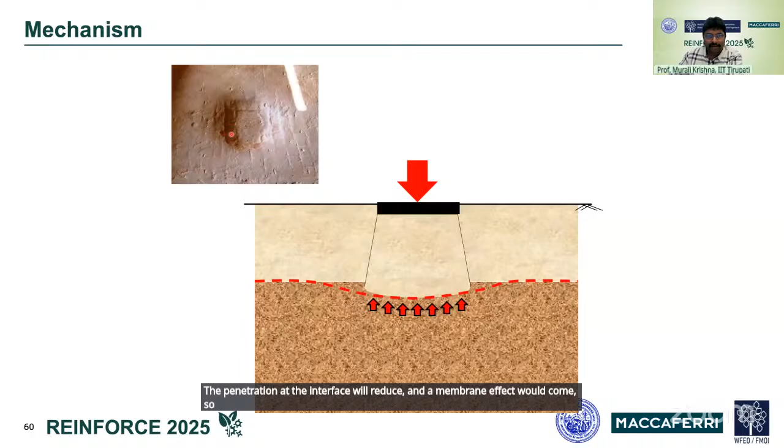And when you are having the layered configuration without reinforcement, we can see the penetration at the interface, a significant penetration, and deformations are larger. When you introduce the geogrid reinforcement, the penetration at the interface will reduce and a membrane effect would come. So this is a typical representation of the thing. When you are having the geocell reinforcement, the penetrations would be much less, and a large semi-rigid beam type behavior could be seen, and at the interface you can see much less deformation.

The super level of reinforcement configuration with the geocell and geogrid, when you place them, you will be getting much higher performance, and you can see literally there is not much deformation at the interface, and loads are being distributed too wide. This is an unreinforced case. This is reinforced with the geogrid geocell. You can see the extent of the deformation at the interface and so on. In this case, there is an interlocking between the base geogrid and geocell that can be seen, which will be providing much support. There is a possibility of the top layers buckling a little, but it doesn't matter. Your performance will be good.

So with that, I conclude. Geosynthetic reinforcement, in any form, is very effective in enhancing the foundation capacity. Of course, in the level of order, if you can see the things. Improvement or the performance depends on the footing settlement level. Depending on the serviceability condition, whether 5% of the footing settlement, 10%, depending on that, we can achieve the different levels of improvement.

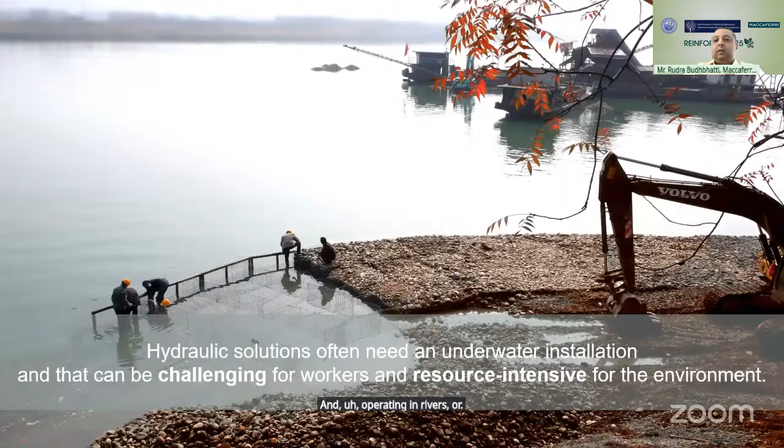So the effect of climate change combined with the ever increasing requirements of urbanization often requires work in both rivers and coastal environments to operate underwater. And operating in rivers or, in general, in hydraulic environments, projects often require working partially or sometimes totally underwater. This means that we need to face more challenges as far as manpower is concerned.

Another typical case is the construction of bridges spanning across rivers, where piles require an erosion protection solution for their foundation. Even harbors and marine areas are frequently required to increase and modernize their capacity, and hence require more erosion protection due to the increased effect of navigation. So the technological developments of the industry in the last decades focus more on both environmental quality and on the sensitiveness of the working environment through risk assessment.

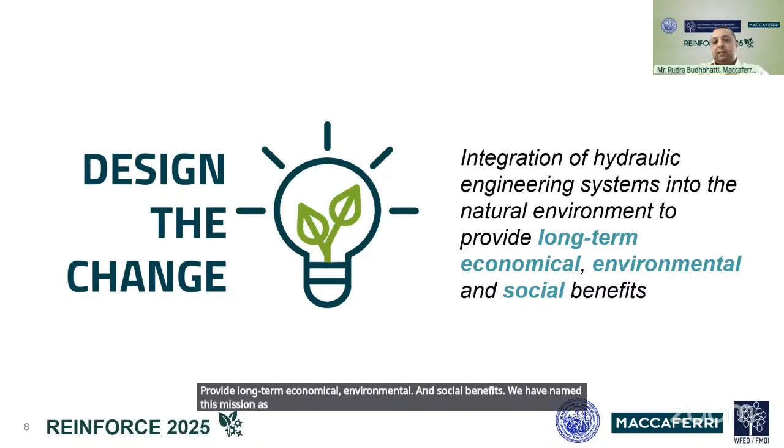The research studies on erosion protection systems focus on the importance of the resilience of the ecosystem to provide long-term economical, environmental, and social benefits. We have named this mission Design the Change. With this in mind, while you know that Gabion mattresses or Reno mattresses are quite common these days as hard armor lining, especially for bank protection works, we have researched and developed an improved type of mattress, which we call Reno Mattress Plus.

Now let's have a look at what it is. In this slide, you can see that Reno Mattress Plus has various components which are a little different from the standard mattress. Starting first with the double diaphragm. Typically, the mattresses are with a single diaphragm. This is a double pleated diaphragm to make it stiffer.

Then we have X ties to connect the base to the lid, and also an improved version of the polymeric coating, which we call PoliMac, to give very good protection against mechanical loads as well as chemical aggression, because these are all hydraulic solutions and in constant touch with the water.

Now, the high pressure resin polymer also makes the mattress particularly suitable for river environments and even very harsh, polluted environments as well. The road to this development, meaning the Reno Mattress Plus, is not something very old, in the sense that, of course, the first mattress version was developed way back in 1920. This was followed by the invention of Reno mattress in 1960.

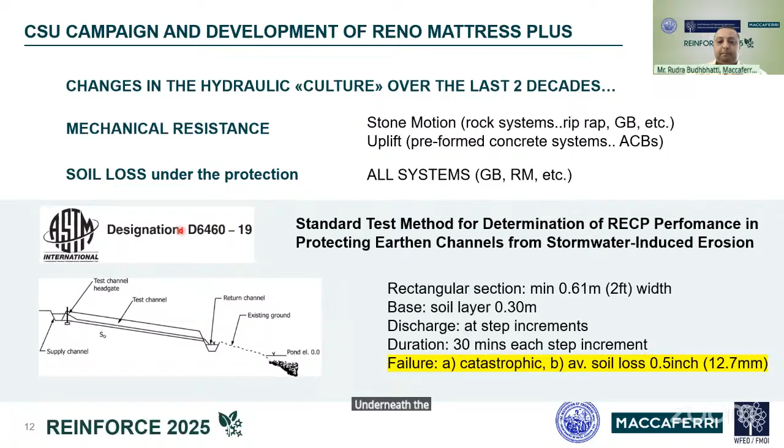So the traditional riverbank solutions constructed with loose stones, or what we call riprap, require quite thick layers of material to be effective. And with the Reno Mattress Plus development, the thickness of protection can be drastically reduced, thus strongly reducing the material consumption. This very much optimizes the use of materials without compromising on the effectiveness of the solution, thanks to the better performance of Reno Mattress Plus. And this, of course, brings along a huge amount of cost savings.

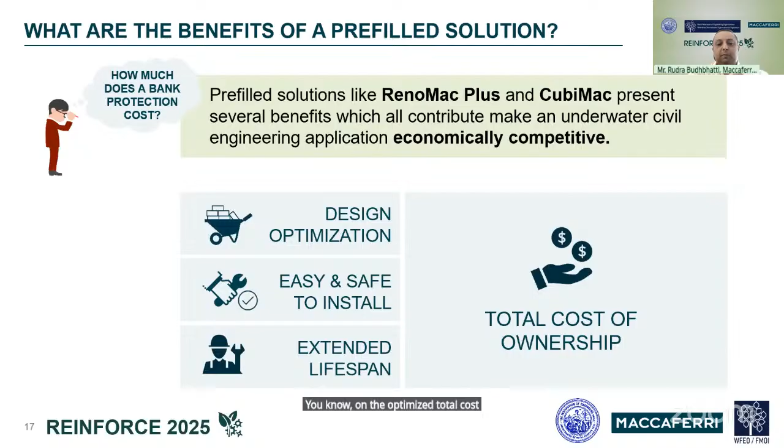Once the pre-fill units are filled, basically they can be stocked at a convenient site and then transported. So here you can see examples of Renomac Plus on the left, which is pre-filled and ready for transport. And on the right, you can see the CubiMac, which is again a pre-fill unit, and it is in stock and it can be quickly transported to site.

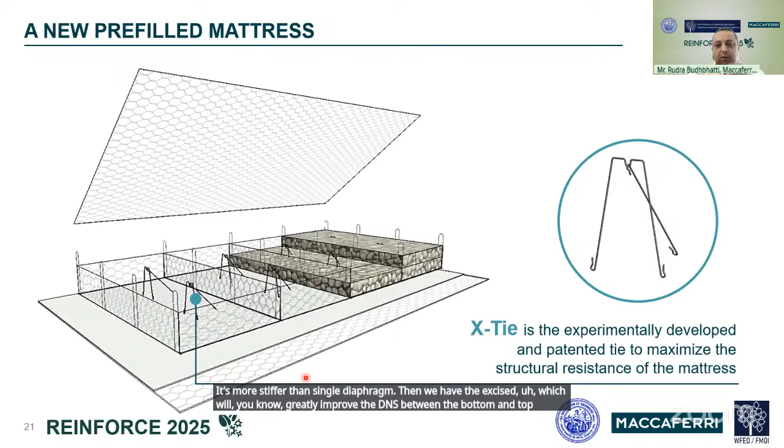As previously said, the Renomac Plus is a special unit designed for installation underwater, and there are certain peculiar characteristics. Some part, of course, is something similar to the Renomattress Plus that we saw earlier, meaning that yes, it has the double diaphragms, which confine the stones in a much better way, since it's stiffer than a single diaphragm. Then we have the X-Ties, which will greatly improve the adherence between the bottom and top panel, further increasing the stone confinement during handling. Plus, what you see at the base is geotextile filter, which is pre-attached along with the extended panel at the base to keep the continuity of the protection between adjacent units.

Because do remember that when we are talking about underwater application, many times it's not feasible to do the lacing of the units together. And hence this extended base is required to have the necessary overlap and prevent erosion between the units that are placed adjacent to each other. The rebars then are, of course, added to help with the lifting. They are assembled as part of the system only, and then they help in providing the uniform distribution of stresses during the lifting operation. So all this is, let's say, prefabricated in the factory itself, and then all that is required to be done on site is open it up and then do the filling of stones and finally attach the lid. That's all.

The lifting frames are sized to basically best suit the dimensions of the unit and the lifting equipment, that is the crane. And lastly, of course, the abrasion resistant coating is important to boost the performance against the abrasion effects.

Now, I will show you another interesting development in terms of the performance of Renomac Plus. I'll give you now an overview of the research that was done in 2023 with Deltares, where the pre-fill mattress design, basically the understanding of its performance, was done against the jet propeller actions of the berthing vessels.

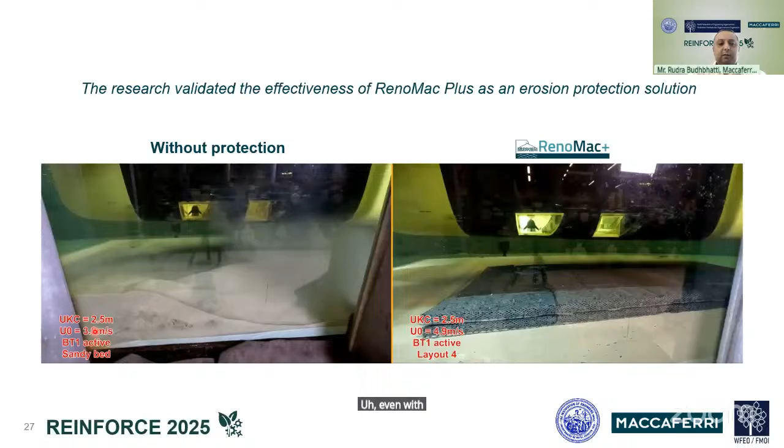So in this video, you can see the deformation test conducted on a scale model in the lab. On the left, what you see is a sand bed without any protection. And then you can see on the right, the bed which is protected with a Renomac Plus unit. And on the left, you can see substantial erosion is happening. So on scale, basically almost 3 meters of erosion happened, whereas in the case of a protected layer, even with a higher velocity than this one, there was no erosion. You can see some bubbles from the moving propeller, but otherwise there is no erosion happening on the bed. Whereas on the left, you can see substantial erosion happening.

So the outcome confirms the evaluation method with updated resistance parameters for the design of Renomac Plus for such applications. And this allowed for the validation of the resistance parameters. So with these tests, we have seen in a real way what the actual behavior of this kind of solution is. And based on the guidelines provided by PIANC, the recommended design formula is derived by Pilarczyk studies. In this formula, the minimum required thickness of the protective layer, which is defined by D, is basically a function of various parameters and coefficients.

Among these, the velocity at the bottom is the main forcing factor in relation to the Shields parameter, which represents the strength of a chosen material. So the minimum thickness of the protection is thus inversely proportional to the critical Shields parameter. The new parameter defined through research for Renomac Plus has a much greater value, which you can see now on the screen. So the critical Shields parameter for riprap is 0.035, for concrete mattress it is 0.07, and for Renomac Plus it is 0.19. So with this you can see that there is a substantial reduction in thickness that can be offered by utilizing Renomac Plus as a solution.

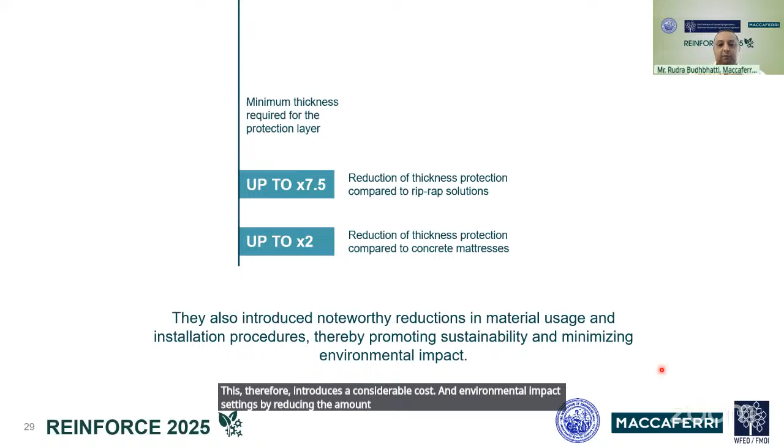Now let us have a quick look at Cubimac as a unit. So in terms of the structural strengths of Cubimac, basically, as I was mentioning earlier, it is made with a bigger wire diameter, 3.4 or 3.9 mm, making the overall robustness of the cage particularly suitable for handling phases for lifting and launching. Typical meshes otherwise are of 2.7 mm wire diameter, just for reference. Then there are also the lifting slings, the bar at the base, and the additional base panel, bottom of the basket, designed to firmly anchor the slings at the bottom of the unit. This ensures safe and sound use, so that there is no issue at the time of lifting and it's perfectly safe.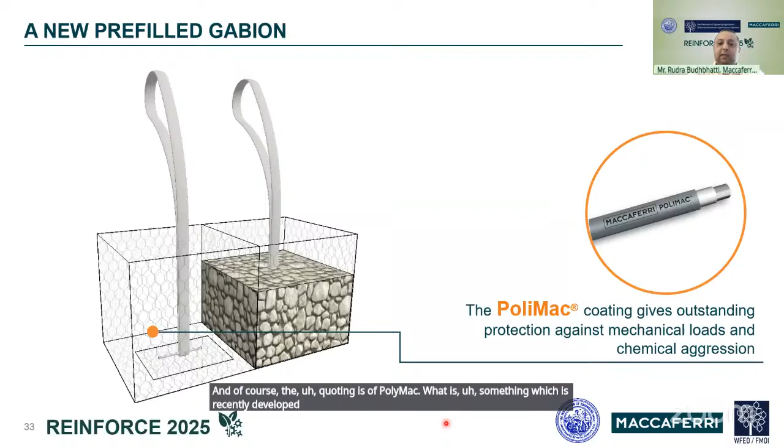And of course, the coating is of PoliMac, which is something recently developed to boost the performance against the abrasion effects. Just to give you a quick comparison between PoliMac coating and PVC. PoliMac, of course, has over 120 years of design life, and it has 12 times better resistance to abrasion, including installation damage, 23% harder than traditional polymer. It has even better performance in cold weather, and it has more resistance to UV rays, making it, let's say, a better coating in all the different kinds of environments possible.

Now, let us have a look at some of the case studies, which I believe you will find interesting. I will start with a case study for a bridge pier protection in Bordeaux, France, on the Garonne River. Here in this case, the shear stress acting on the foundation of the bridge piles required an erosion protection measure, and RenoMac was chosen among the alternatives because it could provide continuous protection on the bottom due to the overlap of the units, because there is an extended base with the additional mesh and geotextile present. So RenoMac significantly reduced installation time, and this was a plus due to the limited time to work because of the tidal flows coming in from the ocean a few kilometers away.

Units were basically filled on the riverbank, and the installation underwater was performed with the assistance of divers. Compared to the traditional loose stones of larger size, this solution basically allowed, let's say, a solution wherein the requirement of maintenance or replacement over time was not there. Because with traditional loose stones, more often than not, at frequent intervals, we need to carry out maintenance. If some stones have rolled away, we need to replenish them. All such things can be avoided with the installation of RenoMac units, because it's a confined solution. They also, of course, require a lesser amount of filling material, approximately 70% less, based on the performances that we have seen, as opposed to the conventional loose one.

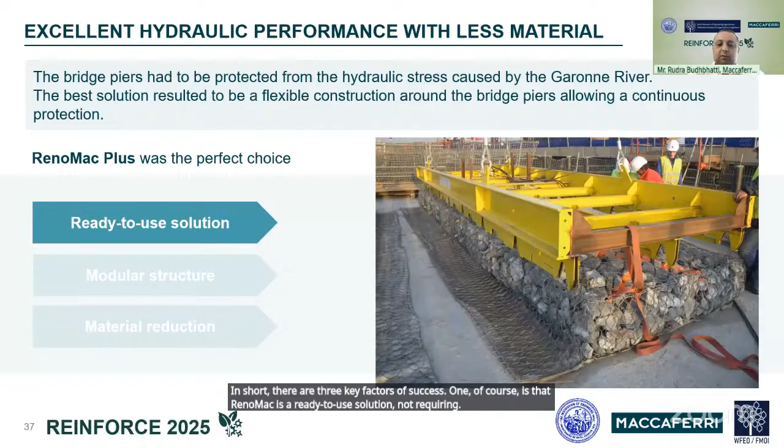In short, there are three key factors of success. One, of course, is that RenoMac is a ready-to-use solution, not requiring any special assembly on site, because it's a pre-manufactured unit. It helped in reducing the preliminary earthworks and avoiding risk of damage to the foundation, because it's a modular structure. And the volume of stone is drastically reduced as compared to the equivalent performing protections by up to 70%.

This is another case study of a project which is located in Arles in France. Basically, the location is such that it is crossed by the Rhone River in a section close to the sea. The port along the river has a quay wall, which requires some protection measures to prevent scour generated by the ship propellers.

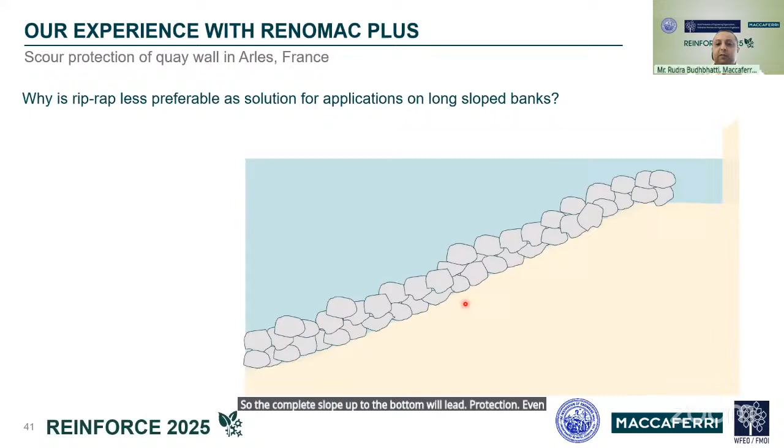So why is riprap not the preferable solution for applications on long slope banks? The reason being that, to prevent the rocks from becoming unstable, it has to be extended right up to the bottom of the slope. So the complete slope up to the bottom will need protection, even though the actual area subjected to erosive forces may be only this much, what you see here. But if we place the stones just here, typically they roll down and then this will be exposed. So hence we need to protect the full slope with riprap, if riprap is used as a solution.

So why was RenoMac Plus a preferable choice? Because we can treat the specific area which is subject to erosion, and you don't have to extend the protection up to the toe, which leads to savings plus reduced thickness.

And how is this done? What you see here is the placement of the unit, which starts from this point onwards, and then it is anchored to the top with the help of the pre-filled Gabion unit, which is called CubiMac. So this acts as an anchorage, and this anchorage prevents the sliding of the mattress further down.

Of course, we can check the sliding potential of the mattress by doing some stability checks. So with this, the overall solution was optimized as far as the length is concerned, and also with respect to the thickness.

The third case study is a project in a challenging climate in Abidjan in the Ivory Coast in Africa. Part of the port rehabilitation was done because there was a need to increase the navigation capacity, and this required building a 450-meter long, 16-meter wide jetty where the boats could dock in a quay which was 8 to 10 meters deep.

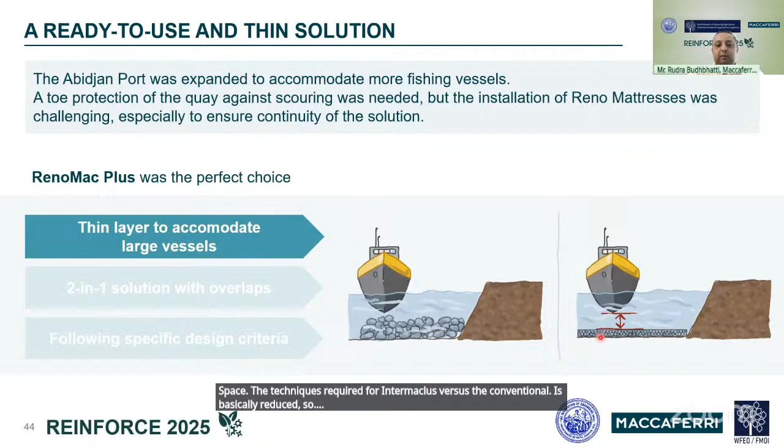Number two, laying the units adjacent to each other on the overlap made it very convenient to do the installation, simpler as compared to conventional. And the design, of course, was done through the PIANC report 180. This report basically gives detailed background information about the vessel propulsion, allowing an effective design of the quay wall protections against erosion.

Now let's have a look at case histories related to CubiMac units in underwater applications. So this one is in Stuttgart, Germany. The project is a part of a 1,500-kilometer long rail link connecting several cities in Europe, and consists of rehabilitation of the rail network. Part of this project was the construction of a new railway bridge over the Neckar River,

and the construction of the bridge required that the bridge foundations were to be built in the middle of the river, and the design included the construction of an artificial piece of land protruding into the river, and that land was to act as a temporary platform for the construction operations. So CubiMac units were used for a major part of the project, as the requirement was to operate mainly underwater. Divers were required, and they assisted to ensure that the correct installation was carried out.

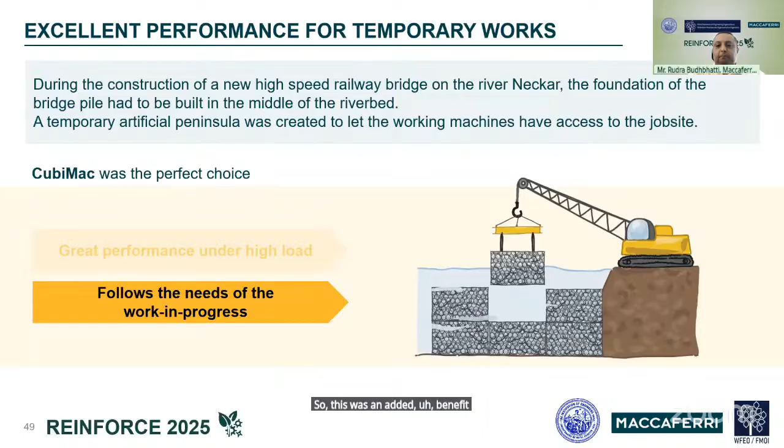And now this is another case history of a project which is located between Brittany and Normandy, again in France. In this area, the Sélune River flows into the bay, carrying a considerable amount of sediments. And for this reason, a solution was required to prevent the polluted sediments from flowing into the bay area, and to avoid water contamination.

Closer to us, this is one case history in India where the project is still ongoing. There is a project ongoing here at Guwahati on the Brahmaputra River, where there is a severe scouring issue at one of the piers in the bridge, which is under construction at this point of time. And this required erosion protection works to be installed at a depth of 35 to 40 meters underwater. So in this case, a pre-filled mattress, something similar to what we call RenoMac, was used.

And you can see here, this is how it is shipped from the factory. You just have to open it up, fill the stones, and then it can be lifted and placed at the project site at the pier location with the help of cranes and a lifting frame. This is still under way in terms of construction, and so far it's working fine.

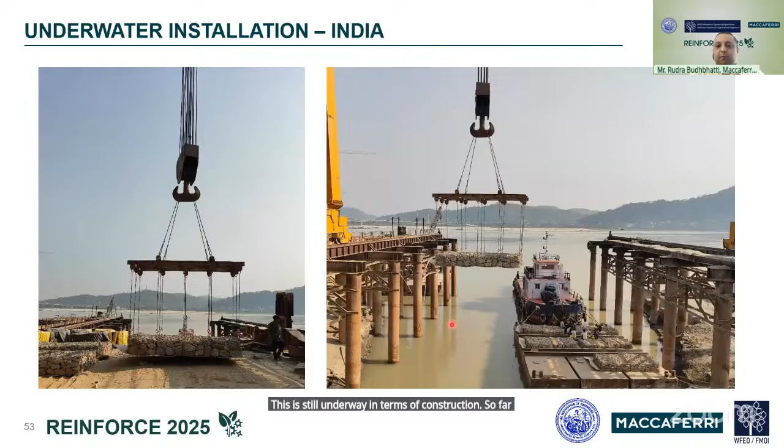Now, with all these updates, we have also worked on our software suite, which you can access online on edesign.maccaferri.com. There are several software tools available for your use. You just have to create a login with your email ID, and you can start using these tools for free. Among these tools today, I will mainly focus on the hydraulic design tools, which are the Mackey design and Macra design. Let's have a look.

So the Macra design tool is basically a tool developed to help design channel and bank protection works. We can do the cross-section analysis for the longitudinal works, basically for free surface channels with steady, uniform, turbulent flow. This is the criterion with which it can do the analysis.

Now, the cross section can be modeled as per the project requirements, and it can be lined with specific material to emulate the erosion forces. And you can do a lot of permutation combinations because this accurately models the tractive shear force across each segment of the channel rather than the conventional tools. For example, HEC-RAS gives the shear stresses for the full section, not individual sectors in a particular channel. So that's the main difference and an advantage, wherein you can do a lot of optimization in the design. Of course, it has also been compared with HEC-RAS, and there is hardly any variation in the overall output. So it is well aligned as far as accuracy is concerned with the conventional tools.

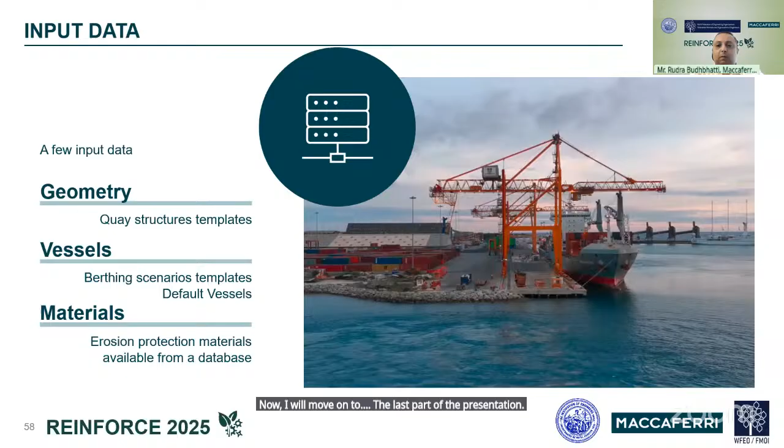Now I will move on to the last part of the presentation, which is smart engineering based on IoT technology. What we call HelloMac Hydro. Now, I'll give you an overview of four main applications of HelloMac Hydro. The first application that we see here is the smart bank protection.

So in this application, HelloMac Hydro makes the gabions and mattresses smart by integrating a simple non-invasive sensor that triggers an alert when the water levels exceed a predefined safety threshold. There are many suppliers of monitoring devices in the market. The key advantage of this particular system is that it's based on an IoT connection, and it transmits the data to the cloud, which will give you a very quick alert in a matter of seconds, and also provides an early warning alarm in case of a flood event.

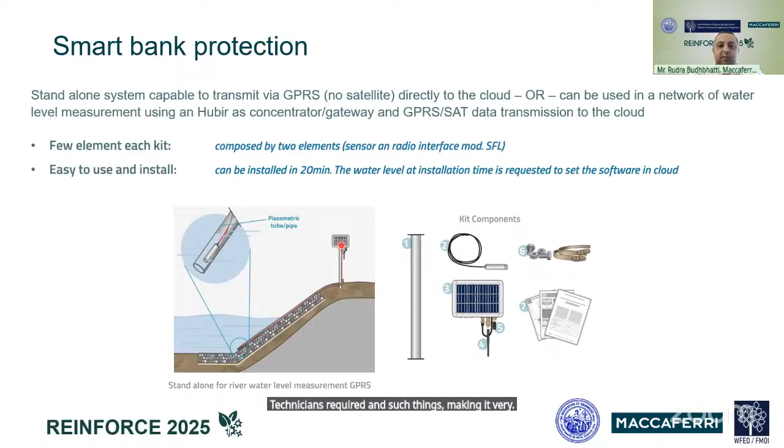The second application is related to smart bridge monitoring. Some aspects were shown in one of the presentations yesterday. I'll just quickly run through it. So the HelloMac Hydro for bridge application combines the monitoring with an early warning system designed to detect potential scour issues before they escalate and create a lot of structural issues in the bridge. This system is capable to detect erosion at the bridge piers and the water level changes. So the solution features a lightweight, basically very compact, easy to install device connected to the river bed near the bridge piers. And this device essentially detects erosion, and if it exceeds a defined threshold, it will give an alert.

Additionally, the system also includes an ultrasonic or a radar-based water level sensor that is mounted near the bridge deck, ensuring the early detection of rising water level. So in case of a flood, it can give warnings and alerts to the users of the bridge to be careful, or if needed, authorities can also shut down the operation of the bridges. So by integrating these kinds of components, HelloMac Hydro offers basically an all-in-one innovative and low maintenance solution that provides reliable safety for the bridges.

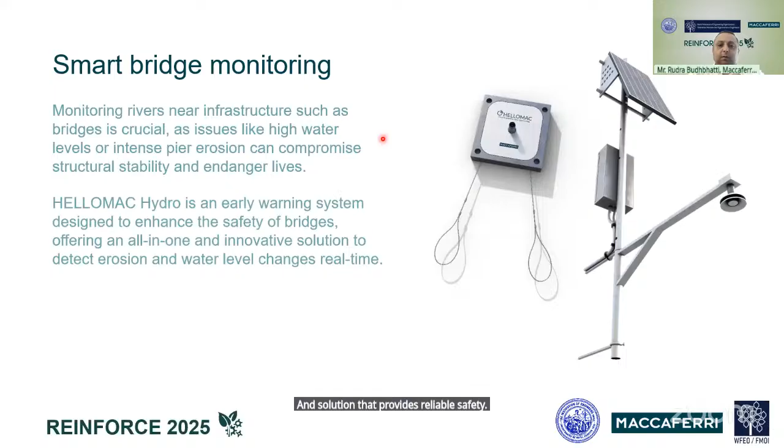So in terms of smart bridge monitoring, this is what it is composed of. Of course, it's a complete system for bridge hydrometric level monitoring and bed erosion. Both are included in the same network, and all the devices again are based on IoT technology, which is connected to the Hubir, which acts as a sort of a collecting hub and transmits the data to the cloud. And that transmission can be via GPRS or satellite. This Hubir can be installed within a radius of 5 kilometers from the bridge. So it can also be installed at a safe location far away as well.

In terms of the elements of each kit, there are 3 elements in the kit. One is a water level sensor, the radio interface, and the scour detection sensor, plus the Hubir. The water level sensor can be ultrasonic, which has, let's say, a coverage of 0 to 6 meters, or it can be radar, which can have a coverage up to 10 meters. And there is a possibility to use extra scour sensors also for multiple bridge piers. It's again very easy to install and use. It's just a plug and play system. And once installed, it is immediately in operation.

In terms of flexibility, yes, you can also integrate the system with local alarms, and you can integrate it, for example, with traffic lights or some sirens, however you want to have an alert created locally, apart from you getting the alert via SMS or through the app or an email, however you want to configure it.

So this system is again equipped with an inbuilt IoT transmission system to send the data to the cloud platform through a data logger. This system is powered by a solar panel, and there's also a backup of extra batteries. So the integration of technology and environmental management is essential to safeguard the ecosystems and ensure regulatory compliance, combining the structural protection with such advanced quality monitoring potential as well.

So in terms of the kit, it is composed of 2 elements mainly. One is the sensor and then the data logger. It's very easy to use and install, just like what you've seen in the other systems. Installation time here in this case is very quick. Also, it can install in 3 hours, and the water level, of course, is required to be provided as an input so that it can be set on the software.

And finally, the last application which I'll show is the smart quay monitoring. Let's have a look at that. So HelloMac Hydro provides an advanced solution to monitor the safety of the ports with an early warning system for scouring near the quay walls. This system has been designed and developed with simplicity and modularity to be installed in a number of required locations, and then it can be used to monitor multiple points of interest along the quay wall.

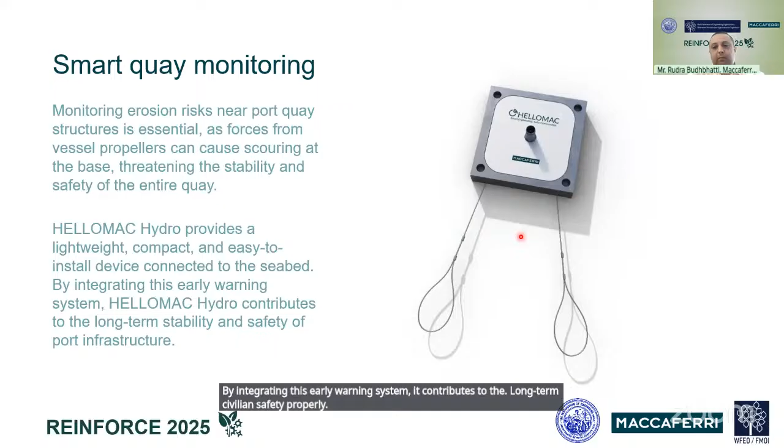In terms of elements, each kit has one element in the sense that there is the scour sensor plus the Hubir, which is the gateway that transmits the data. There's also, of course, the possibility to add extra scour sensors to monitor multiple points that I have shown. And it's again plug and play based on IoT, and you can also have local alarms set through the Hubir, apart from the online alerts that you can get.

Now, all these systems that you have seen are based on IoT principles, just to remind you, and can work on 5 different types of network, be it GPRS, 4G, satellite, LoRaWAN, Wi-Fi, and high-speed connectivity is guaranteed in all potential project environments and areas. The transmission of signal to the cloud is done in a matter of a few seconds, and you will get an alert on an immediate basis.

The alert can be had through an app which is available online on the app stores of both Apple and Google, via an SMS which you can configure, and also email. Apart from that, we can also see the different sensors on the online dashboard as well. So basically, you get real-time insights at your fingertips, and you'll always know where the sensors are located, which sensor is activated, what are the measurements, by just having a look at the app.